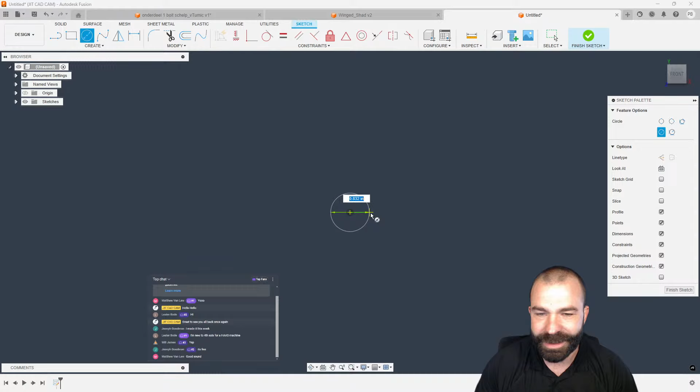In the meantime, I'm going to go ahead and swap my screen over here real quick, and we're going to actually start a brand new file because I am going to model what it is that Matt brought to my attention. And I'm not kidding you guys, this was maybe 5-10 minutes ago. What he has is a very specific kind of profile on a part.

Now let's go ahead and give this some rough dimensions. And once you guys see this, I think you may or may not be able to paint the picture of what this could be. And we're going to throw another rectangle kind of around everything here. And that's going to be a little exaggerated, so let's bring that down. Let's get this guy brought down and extrude our profile. So on something of this nature, now there is a gap up there. We're going to have to fix that.

There we go. The issue is undercutting inside of a part or a profile when machining. So as you guys are going to see here in the specific use case, there's something that he is making that supposedly rhymes with rock, that it's very important that you get in and machine out these undercut profiles. Now, I may be wrong. I don't think it's rhyming with rock. I think it rhymes with something else.

Let's get into our manufacture side of things. As you guys know, we're going to go ahead and do our Z axis. Let's put X in the right way just because. And then with that, we're going to start to attempt this with a couple of toolpaths. I am going to fix my setup because it's going to be much easier to generate my stock model as we work. Now, the question is he was concerned about using a parallel toolpath with 5-axis. And with that, we're going to start with the basics, which is let's get our toolpath basically where we want it.

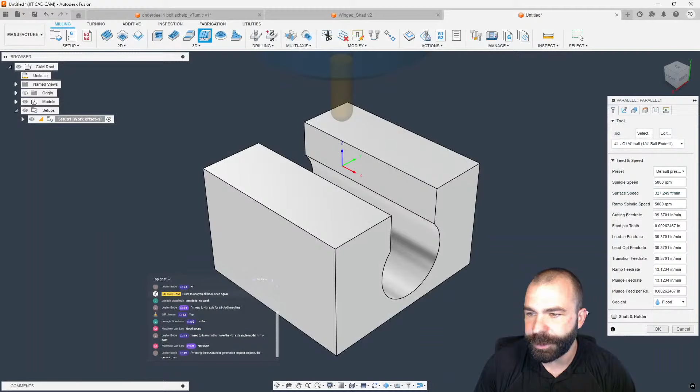So I'm going to go ahead and select the tool. Now, whether or not you're using a ball end mill on your end, that's going to come up to you. I am going to actually have to pull one from the default library. Get us a smaller 1/4-inch ball end mill here. I'm going to swap out the holder once we get everything set up. So again, we're going to go back from there. Let's go ahead and get that tool stuck out. Give it an end mill holder. We should have something in here. So give me a few seconds here, guys.

That is not going to work. We're going to need something that's kind of like a long extension. I think this is the one I'm looking for. There we go. A little better. Now, the idea right out of the box, we're going to go ahead and hit OK and get a toolpath. But as you guys can see, as of right now, everything is still in 3-axis mode.

So I'm going to go ahead and shift gears and let's step up the capabilities here. Now, what I'm going to do is go to 5-axis. Now, we could use vertical, and what vertical is going to do is keep our tool pointed vertical as much as possible until it can reach underneath or it starts to hit that tool holder. Now, the problem with a strategy like this is because it is still defined as vertical, it doesn't know anything that is going to happen with undercutting.

So a few more things I might need to do here, as you guys will see me walk through, is utilizing a different strategy. Now, this is where we get into our actual different types of control for primary tool axis. One that I would recommend is we could either go from curve, which would be very, very valuable, or from point. Now, the reason why I'm saying from is because on this particular part, we are working in a female or like a negative side of a cavity, right? So we want to always keep our tool from a specific location.

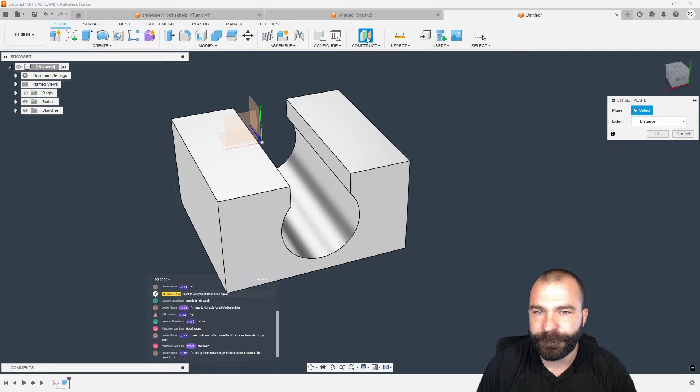So let's go back. Go into our design. I am going to clean this up a little bit because from what I remember, this top is actually much lower. Again, just making it a little easier when we create our toolpath. As you can see, that's now done. And I am going to create another kind of plane to work from. So where you put this plane at the end of the day will make a pretty big difference. But I'm going to go ahead and create my construction plane.

And I'm going to place it on the top of my part because I can move that plane at any time. And upon moving that plane, we'll move the sketch that I'm about to create, which is going to be nothing more than a line down center. So as you guys can see, that line is up there in space. If I go back to that construction plane and I pull it up higher, that line is now moved up higher. If I pull that plane down lower, you're going to notice that it brings that line down lower. So again, this is a neat little trick, especially if you're doing some 5-axis stuff.

So let's go back to manufacture. Let's get into our toolpath and swap out our primary mode to from curve. And then our curve is actually going to be that line right there. So as you guys are going to see now, up on the top, completely useless. But what is going to happen is once we start to get down underneath and start machining things. So again, we could make some more adjustments here. If you guys didn't know, this is where we could go in and select our boundary.

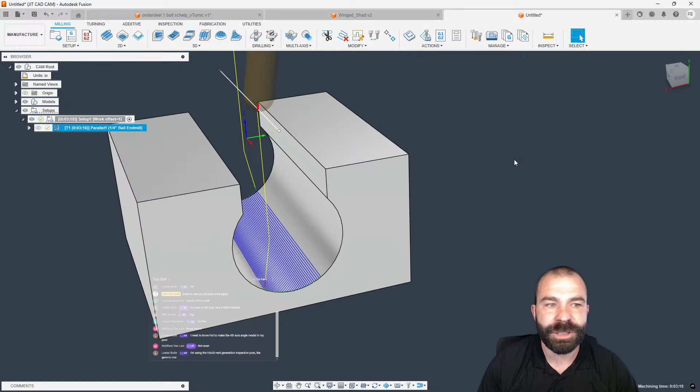Now our boundary could be based on some of these profiles, but because we have overlapping in the corners, I don't know if you guys could see that, it's going to really shrink down the profile we're working with. So this is one of those very few situations where staying silhouette, however, doing an avoid surface kind of selection might be beneficial to you. So we're going to go ahead and say avoid surfaces, and we're going to generate that toolpath back. Again, now we are inside of that cavity.

And if I was to simulate this, let's get squared up to our part. You're going to notice that my tool axis right here where this little point is might be actually a little tricky. Let's flip sideways. That is the center line of where my tool is calculating from, right? Yes, I know we're crashing the machine right now. Not a big deal. But that is what's determining as we work down and back across the part.

I'm going to go ahead and hit play here. And we might have to adjust a couple of things. Let me get my accuracy turned down a little bit. But as you're seeing, that tool is slowly stepping around, almost like a clock, right?

That minute or second hand on a clock, we're working around, always maintaining center line of that actual edge. Now, this is where it gets better, because if I go back to design and I lower said point, what you're going to notice is when we're in the manufacture workspace now, that tool path is going to tilt further and further and further out.

Give me one sec here, guys. I got a little bit of an itchy nose going on.

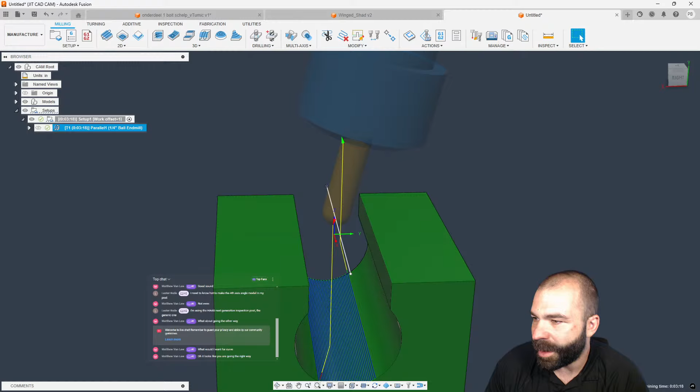I need to know. Okay, Lester, we're going to get back to you. What about doing it the other way? What would I want for the curve? Oh, it looks like you're doing it the right way. Yep, 100%. So I figured you wanted to run down that surface.

Now, at this point, one cool thing is if I was to change my pass direction to horizontal across my part, same rule is going to apply. We're going to swoop back and forth inside there, but it's simply just going to constantly maintain the center line of that tool. So as you guys can see, she's just rocking back and forth. Again, we want center line of tool to intersect with the line that I generated.

So as you're seeing, if that line gets further and further down, there is going to be a point where we actually need that line to be at a minimum tangent off our circle, but also I am going to fix our tool here real quick. So give me a quick second. We're going to go in and I'm just going to pull that end mill out a little bit longer. Let's say 2 inches.

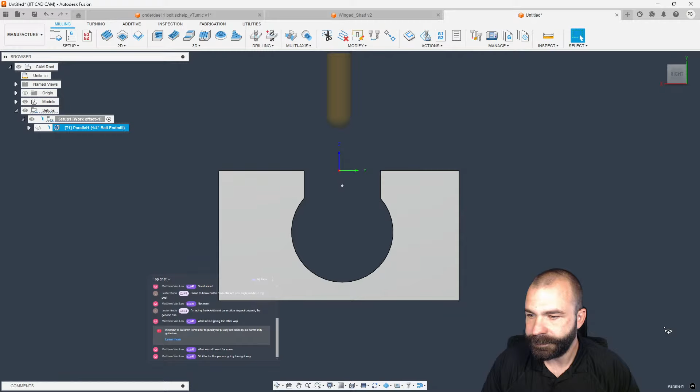And then with that, let's go ahead and jump back to the design side. And we're going to bring that actual plane down further. Now, if you get too far down in here, the rule still applies. We got to worry about the back side of the tool versus the front side of the tool. And I will have to actually take off pass direction. And just like that, we're starting to wrap around a little bit more.

But the real problem is going to arrive at the fact that this is a 3-axis toolpath. Actually, I shouldn't say, it's a 3-axis toolpath with the ability to do 5-axis. Now, this is where you may want a completely different strategy to do undercutting. A couple of remedies to this would be instead of doing 5, we may actually want to go through and do this as 3 and do tool orientation.

So as you guys can see here, I'm going to go ahead and use my good old-fashioned steering wheel controls. But if I was to tilt and turn that tool, as you can see, I could start to achieve more things, getting further and further underneath of where that profile is. I'm still limited at the end of the day. I still need to possibly go in and add additional faces to my avoid grouping. And lastly, let's tilt our tool just a little bit more.

Now, I am going to switch strategies here because I think there's going to be a better strategy overall to utilize against a part like this. And that strategy would be getting into steep and shallow. And then from steep and shallow, I am going to force steep only. The reason why I would do steep only is because it allows me to machine undercuts.

Now, when you're using a lollipop cutter or 5-axis, it will actually look at anywhere that it does not have accessibility. This is a pro tip for a lot of you guys out there: if we go ahead and turn on 5-axis, you can turn on tool axis or tool orientation without ever actually needing to define a different direction. But what's neat about this is you can actually do an accessibility analysis in real time.

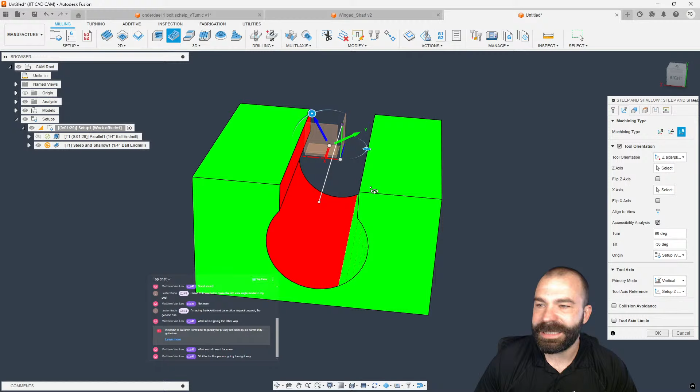But let's get back to it. So we're going to go ahead and turn off tool orientation. I'm going to leave ourselves vertical to start with. Again, let's just get a tool path on the part. As you guys are seeing, we're not getting underneath anything. We've also got a lot of extra stuff going on. So let's get the blue lines where we want them.

Machining boundary is silhouette, tool center. Again, we're going to go ahead and go. We actually probably won't need to do any of the fancy avoid touch surfaces. But Matt, let me know what you think. So this is kind of the strategy you're going for with going back and forth inside there.

Now, again, with the steep and shallow strategy, we could utilize 5-axis. We could then go lead and lean, or again, from curve, picking that line that we have. And as you should see, we're now wrapping down, under, and all the way through. Again, still dealing with collision avoidance. There's a lot of little nitty things that I would have to go through, but this is where we could get even more and more fancy with this.

I'm going to turn off the linking so you guys could just see the toolpath. But if I go back through here a little bit more, let's say we actually do steep and shallow this go around. However, we're going to do parallel. Again, you could do parallel on fixed direction. So we're using contour in the steeps, parallel in the shallows.

And what you're going to see now is, again, because we lost the undercut ability, we're not getting all of that in one shot, right? So this is something that Fusion, again, takes a little bit of time and effort to start to work through and figure out what's going to be your best solution.

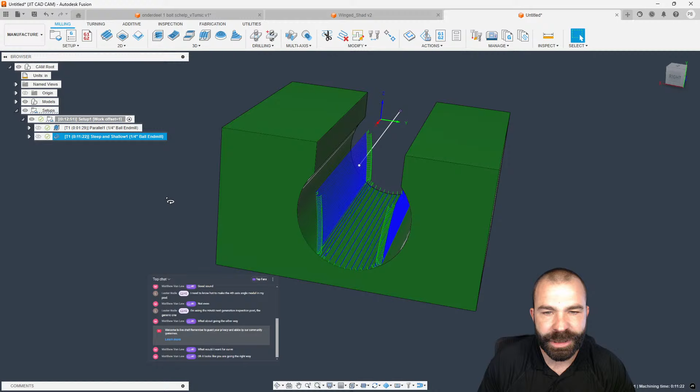But what's happening right now is everything is being calculated from tool orientation Z, right? So it's not going to drive the steep versus the shallow based on the exact location the tool is pointing. It's all still generated coming straight down in Z. So again, if it was me, this is just my take on this, we would go ahead and utilize steep only, machine undercuts. Again, you're now getting that undercut area.

And for those of you out there that don't know, technically the bottom on this use case, there is a giant opening for a certain particular item to come up through. So Matt, I'll give you a few seconds. Let me know how that looks for you. For the rest of you guys out there, feel free to ask questions at any time.

I see Lester went blasting through here real quick. Need to know how to make the 4th axis angle modal in my post. Okay, using the Haas Next Gen inspection post. Lester, are you using machine definition at all? Because that is exactly where I'm going to point you to. Whether or not you use machine simulation will make basically all the difference or none of the difference, but the machine definition is the important part.

So what I'm referring to is if I go in and I select a machine. Now, as you guys know, after this, we eventually delete all of our machines. But what I'm looking to go for is I need to go to the Fusion library and find that Haas machine. So again, as if we filter by Haas. Now, what machine is it exactly, Lester, that you have? And what rotary do you have, if you don't mind me asking? So we'll give you a few seconds.

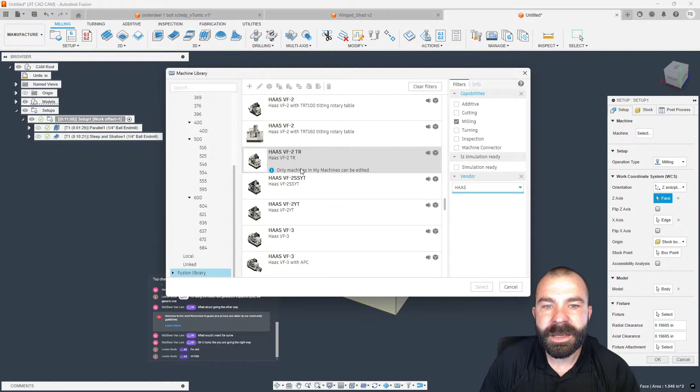VF2SS. Awesome. So there is a ton of different machines inside the Fusion library. As you can see, there's a VF2TR. There's a VF2 with a TRT 160. So you have an HRT, not a TRT. Now, sometimes it's easier just to search by HRT. Again, you're not going to possibly find your exact model. Now, this is where, if you guys have our support package, we have no problem putting together the correct actual machine sim for you to utilize, right?

Now, if you're just wanting to go out and post some simple 4-axis code and you're not worried about machine sim, what I would recommend is that is where you could start by just building your own machine. So as you're going to see, I hit the plus here, pops out this window. We're going to go ahead and call it the Haas VF2SS, and then I love to throw a with HRT 160. Don't really need that generic description, of course.

Now we're going to go down to the kinematics area because we need to order our axes based on how they stack up. For example, the head of your machine or spindle sits on Z. Your X actually sits on Y. And then here with X highlighted, I'm going to add a rotary axis. Now your rotary axis in itself, a few quick tips for you guys.

If you do not have dynamic work offset and things of that nature, we're going to go ahead and turn off TCP. Now, another thing you may want to do is either go unlimited, limited, or cyclic. Cyclic is going to take whatever the dimensions are divided by 360 in this case. Or again, most 4 axes are unlimited. This is a really good point for any of you guys out there dealing with a gantry 5-axis. You can't spin the C axis unlimited. You actually have a limited range or the B axis tilt.

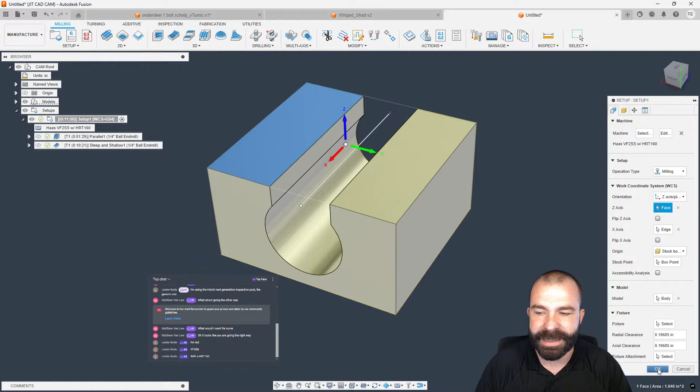But from there, we're going to go ahead and throw a post processor at this. I think I have a completely broken Haas Next Gen post. I am going to update this post to delete any types of problems I have in the background. But just like that, I have now tied the post processor to machine definition, and machine definition is controlling that. The value of this at the end of the day is if you are in a shop and you are responsible for programming multiple different machines, when you tie the machine to the setup and go to post-process things, you don't have to worry about making sure you selected the right post processor. You can also change the output folder, which is extremely handy.

So as you guys are going to see here, let's go ahead and make this a full 4-axis. And as you're going to see here, guide curve cannot use. So we're going to go ahead and turn off guide curve and say 2 rotary axis. I think we're going to get a lot of problems with what I'm trying to do here, but we could go ahead and switch tool paths into tool orientation. Now, something neat, with machine defined, it is telling me that certain things are not capable. So again, we'll just go with the basic facing cycle.

Let's go ahead and go into my templates. Boom, there's facing number 1. We're going to duplicate that. Tool orientation, Z this way. Your A axis does actually require to be pointed in the correct direction as well. But if I was to post-process this out, Lester, I think you're going to get exactly what you want, which is going to be your A0 command and then your A negative 90 in this case based on my tilt. Now let me know how that is looking on your end, and is that what you're looking for?

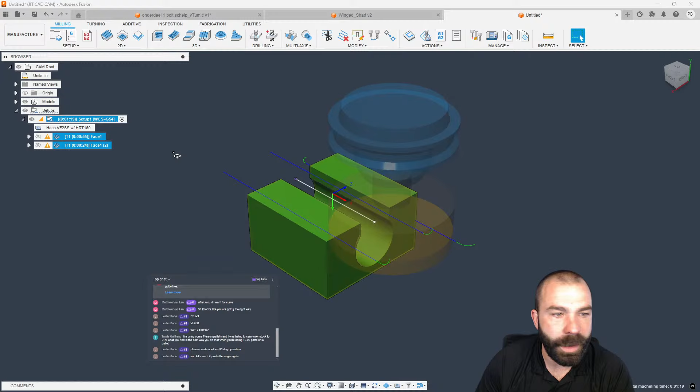All right, so please create another negative 90-degree operation, and let's see, okay. So do you want me to go about the palette situation? Are you running first setup out of a bar, or are you running individual blocks on a palette?

Man, I don't know what happens to me. Every time I come in here to go ahead and start these free videos and everything for you guys, my nose starts going wild. Lester, we'll give you a few more minutes to answer.

I'm going to go ahead and just create both of them just to see. So again, we're going to go ahead and flip our tool orientation down now. And one more time. And I'm going to actually visit this issue that I'm having. There we go. So you guys are seeing I'm getting this warning, and the reason why I'm getting this warning right now is because I made my stock the exact same size as my part itself, right? So again, because of the parametric recognition of my heights tab, stock top right now and model top are the exact same dimension.

All right, just duplicate the operations and post. Sure, no problem. So let's go ahead and post process. Again, post it out with all 4 sides. So we're starting now at A0, a negative 90, a negative 180, and then a negative 270.

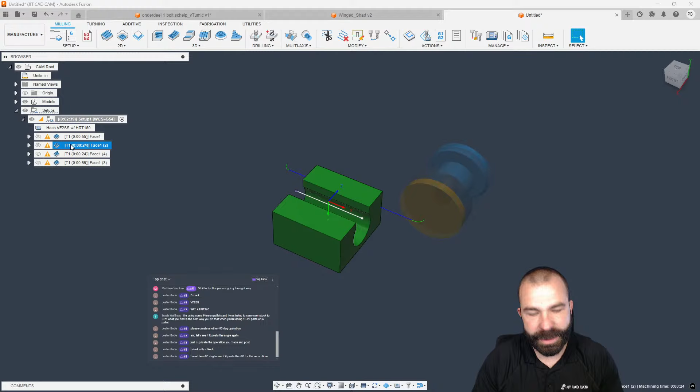I need 2 negative 90 degrees to see if it's possible. Oh, see if it posts the negative 90. Okay, I see what you're saying. So if I duplicate, what we're doing now is we're staying at the same tool orientation when I post process. And what's going to happen is, as he's requesting, A0, a negative 90, but then the second facing operation does not have anything on it for a position, because currently Fusion thinks you're still at that last known position.

Now, this leads me into a pretty good point for some people: in the event that you actually wanted to pick up and run from a specific operation, there is a setting on the next gen controls that allows you to turn on program lookback. Now, if you don't want to do that, when you go to post-process, there is an option to safe start all operations. So by turning that on and reposting this exact same code, what you're going to notice now is A0, we have block skip, abilities to skip over any detail, a -90, and then when I scroll down further, because safe start operations is turned on, you're going to see block skip G0, a -90.

So as you guys can see, nothing more than a little checkbox for safe start operations. It's going to basically take every operation that you're doing and generate that with all pertinent information to that specific one. Now, something I will point out too is I'm still seeing G254, G255. That is the dynamic work offset or tilted coordinates plane. There's a lot of names for it.

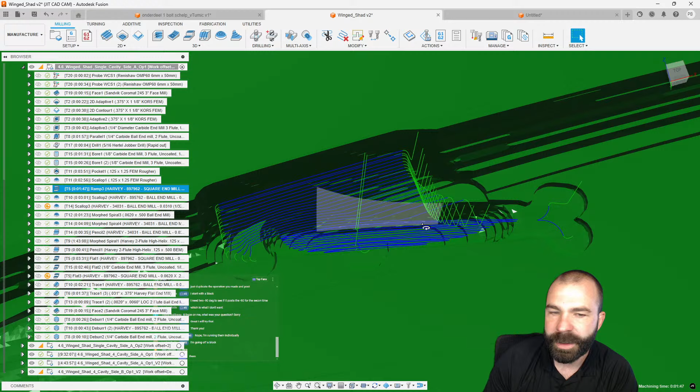So right now, he's got scallop to clean out the material here for this fishing lure. Then he's going into a ramp tool path, and he's ramping downwards. But what I looked at, and the reason why he possibly is breaking a tool, is if I just click through some operations, you can notice from tool 5 to tool 10, there's a lot of material being removed. But with that being said, it's the difference in the overlap of the two tool paths themselves.

So as you're seeing, we have that ramp tool path getting down there a little bit. And again, he's doing a tool change from tool 5. This is a 0625, a 1/16th ball end mill. But this is where I think I would change what strategy I use, right?

So I'm going to go ahead and steal his information and we're going to jump over to, again, steep and shallow. Now, the reason why I like the idea of steep and shallow here is, as you guys will see, I can basically merge down both of the tool paths he was trying to do. Again, we're going to have to drag this back up to the top, I have a feeling. Let's get it back up here with everything else.

And with that, we should see a tool path, and we don't, which leads me to believe that something's on my end. Go ahead and regenerate. And let's see why we're not getting a tool path. Do we have rest machining turned on? We do not. There is our tool containment. Now that tool containment in itself, I also did point out the fact that he may want to go a little bit further out with that information.

But for some reason, I lost all my tool paths. Did we just find a bug or did I push F7? I pushed F7, chasing my own problems.

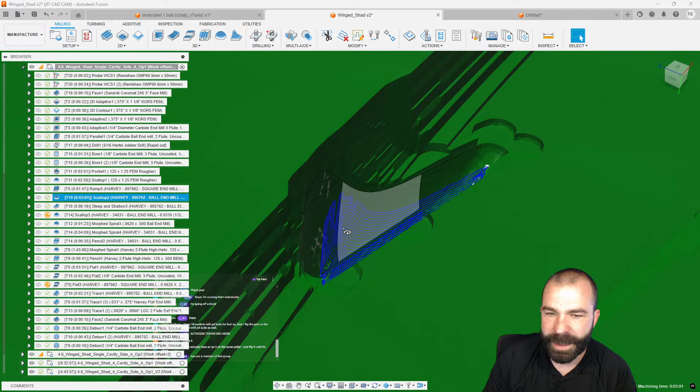But as you guys can see, this is something that I think would be a night and day difference on a location of machining like this. Again, that scallop toolpath you can see is only in the bottom. You can see that parallel toolpath he's kind of only got at the top. He's also using two different tools. But if he was to go in with something like steep and shallow, he does have that ability to go horizontally across, working his way down. And then when he gets down into a lot of these lower regions, we're starting to pick up on utilizing scallop for the shallow and contour for the steep area.

Now, a few other things that I usually do recommend when you're getting into a tight little working area like this is the amount of material you're leaving on the walls makes a large difference. I just want to show you, if you guys didn't know, if I go in and I try to simulate this, as you're going to see, if I push play and let that run, we're going to get down inside that cavity. But now you can actually go through and inspect stock to model, right?

So if I put my mouse right about here, you're going to notice I have 027 material. Getting a little higher, 030. Now, if I zoom in a little bit further, you're going to notice that my graphics card kind of falls apart, but that's what we're looking at in that tiny little region. So the reason why he's possibly breaking end mills is at some point he's going in and slotting to remove material with those ball end mills. And honestly, that's where I think the tool is breaking. I'm almost more than certain about it.

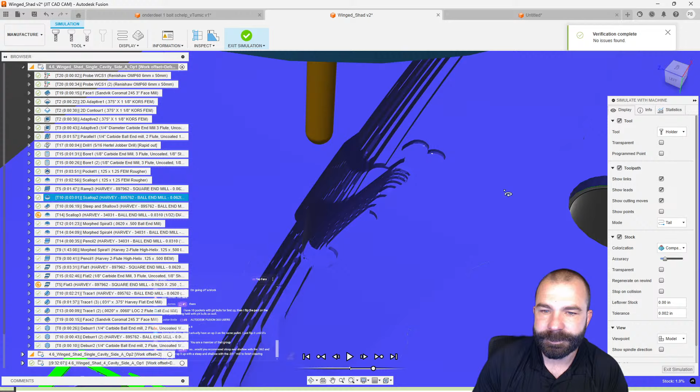Now, another thing I did notice, I'm going to go ahead and jump to his next tool path here. Give it a sec. On this very first path he makes, if you notice, he's plunging down, and now he just plunged into that corner, right? So he smashes down. I don't know how close I'm going to get without turning the accuracy up here. Again, plunged. He's already touching this back wall as well.

And then as he comes across this very first surface, you're going to notice that he's going back up, over, and then bam, plunges way down in there and loads up that tool. So this is something that is probably causing that tool to break at the end of the day. So as you're seeing, that would be where I would start to point my finger.

Where that tool is breaking is because you're loading up that tool in this corner when there's still material there in the way. So it's kind of hard for me to get back. I don't know if the model's going to come back through very quickly. We'll give it a few seconds here.

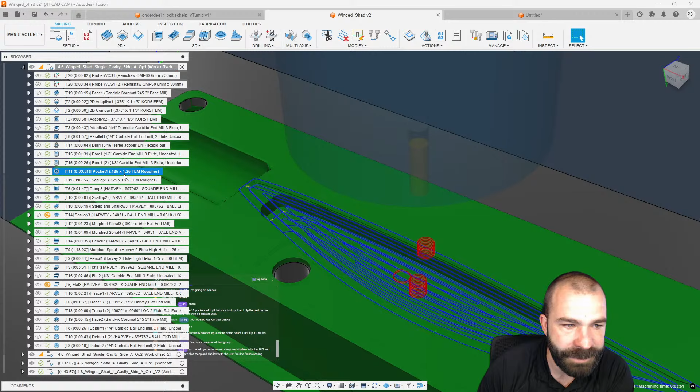But yes, overall, what I would recommend if this is something you're planning to do: the very first thing I would do is, it looks like you roughed out that pocket with a 1/8 inch end mill. I would in some way then go and transition. So it looks like you come into tool 5. So I would actually come off of this tool path. Again, I just duplicated, swap out to tool 5. There it is. And then utilize rest machining to eliminate where I can and cannot go.

So I think you were set to a stock of 4 thou. We get rest machining turned on from previous operations. We want to ignore stock less than 20. Let's go 25 thou and see what we get. As you can see now, Fusion has automatically picked up on what is still left to be machined, which is at least getting me into some type of roughing in that corner. But it's not good from there to jump in and try to do other additional things.

Again, this is where we might actually have to go one level deeper. Again, duplicate. We're going to go ahead and now go to an even smaller tool. As we're going to see, we have a 031 flat here now. And let's see what we get. So again, anytime I can open that pocket up more and more. I think there's a few other settings in here that he may have in place. Max roughing step down. Okay. We don't have minimum step downs or anything turned on. Beautiful. Oh, because you're doing a pocket strategy. That would explain also some of the stuff going on.

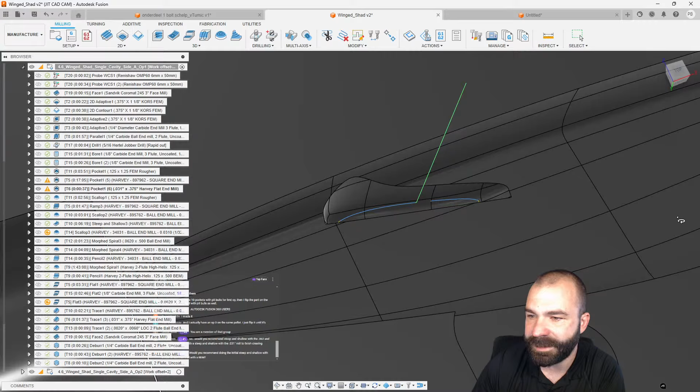So again, you may actually be a little backwards in your thinking. So let's go max roughing stepdown. We'll have to fix that. But now you're seeing that the roughing is really starting to generate more and more. So let's go in. We're going to go ahead and give this the selection that you originally had, limiting our toolpath. As you can see, something as simple as your max step down is also something that could have been breaking tools. But what I'm doing now is I'm just going through, cleaning this up a little bit.

We need a 030 possibly on this tool. Selected boundary once again, because we're just working down inside of more or less a groove now. So again, we don't need to do the entire pocket. We could just focus on that one little area. So how's that looking on your end? Give you a few seconds there, Will, to let us know in chat.

Now that all that material is out of the way, right? Regardless of what strategy you start to do in there, you're going to notice from this toolpath to this toolpath, there's not a huge amount of material actually really getting removed, as in plowing that tool in there to break stuff, right? So again, getting a little bit further, your scallop might have been a little bit better, but I still think at the end of the day, I would have went steep and shallow here. And if I drag this up, we should be able to see this. So again, we go ahead and simulate this tool path.

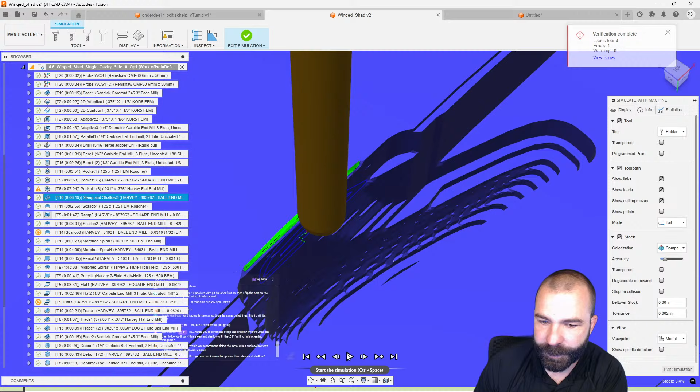I'm recommending going from a large tool down to a smaller tool as much as possible, right? So again, as you're seeing this tool path, a little quick here, let's get it slowed down. We're working top down also, which means we're never really plunging that tool down into our material. We're taking minimal cuts as much as we can. Again, even when you're starting to get over in this corner, we're just working downwards. We're blending everything nice, clean, and smooth. So usually the use case that I would use on a mold cavity is kind of like you have here, right? Big flat end mill to rough everything out, smaller flat end mill, smaller flat end mill, right?

Then we go back. Now, again, this might be personal preference depending on who you are. You may want to finish, if you're going to go from a big end mill to another end mill, very simple to do so. Then go smaller, smaller, and smaller, right? So again, there's a lot of argument out there. I see more of you guys showing up in chat, but overall, usually I always want to work biggest to smallest and tend to stay with a bigger tool as much as you can. It's not always the use case. Sometimes you got to swap out one way or swap out the other way, right?

So this is where, again, if we look at this, you're doing this with an 062 flat end mill. Now, I may want to get in there with your 062 finishing strategy, if I can, right after. But what would determine that on my side is, did I get enough material out of these corners to make a clean tool path, right? So again, I look at that pocket clearing, pretty heavy steps in there still. So I might make that choice to actually utilize a smaller tool to rough out before going into my bigger tool roughing, if that makes sense.

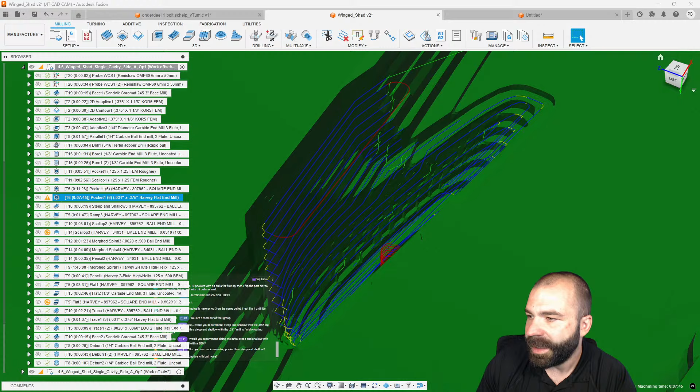Can adaptive with the ball nose? Yes, you can 100% do an adaptive clearing with a ball nose. Same number of parts. Awesome. So we'll go ahead and jump into that. So I still really need to do this. And now that Travis is bringing this up, it's a great time to remind me to start to get into the world of utilizing the ability to link toolpaths to one part and apply them into an assembly or like a tombstone kind of configuration.

So with that being said, I'm going to shift gears here real quick. In the cavity, Stuart, yeah, real quick. So this is technically a pocket strategy. Let's switch over real quick to adaptive clearing. I'm going to have to drag this up. Here we go. Let's get back up to the top. So that is now an adaptive clearing strategy. And then the problem is going to be we have way too tight of an area, so I'm going to have to get minimum radius turned up. But you can 100% rough out with a ball end mill. It's not really recommended, but you can.

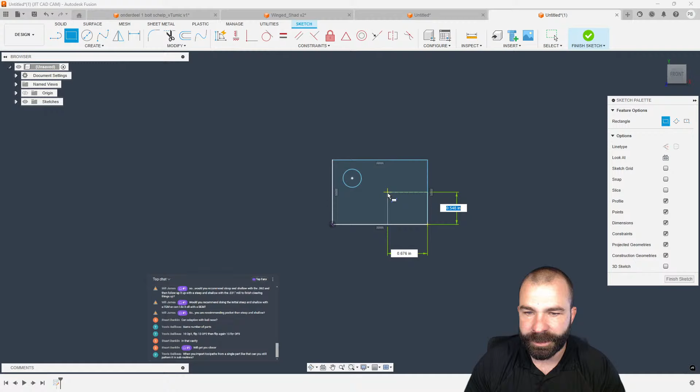You can definitely do a toolpath strategy for roughing with a ball end mill. It could get you closer, yes, by all means. So the idea would be, Travis, as you're saying, yep. I'm going to do this very generically because I'm going to need a couple of things for this to work. First and foremost, I'm going to generate a very simple part. We have a rectangle. We have a hole. Let's throw a second rectangle in here. I'm going to build this as if it's just a rudimentary shape. This is just a placeholder.

Now, normally, if I save this, this would be your part. In the case of this part, I can apply toolpaths to an individual item. Pet peeve of mine, get the sketch out of the way. We create our setup. Where you create your setup work offset does make a difference. If I was building out some type of pallet system, I'd probably want a uniform location. Again, this is all built off what you're going to utilize in your shops. Let's go ahead and face this off. Where do we go? Local libraries? Oh, that's right, I grabbed a bunch of stuff and burned them. There we go, facing it off.

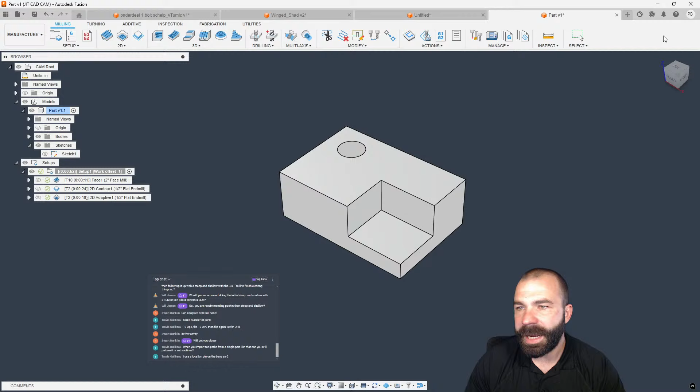Let's throw a path around the outside. Again, let's go VF2 half inch flat. There we go. And then maybe a real quick adaptive clearing in here. So as you can see, I've applied a couple of toolpaths to this part. It's now started to change and modify. Now, where this is going to look really funky is if I was to now start my jig and fixture. So we're going to draw this up on a second sheet. I'm just going to make a very simple pocket for this. Extrude all of this. Repeat extrude.

And as you guys can see, I now have the pocket for the part to sit in, right? So the idea is this is now my pallet. And with that being my pallet, I may have multiple different pallets for the multiple different setups. But if I was to build everything out properly, and I say properly here because I screwed that one up already and I'm trying to cover up for it, the idea would be you would now have your manufacturing, right?

So with that, if I go in and I now start to insert my items, right? So we got our parts. There's my part. Here's my pallet. Give it one sec here. There we go. Part, pallet, so forth and so on, right? So if I was to now do a joint, or if you guys didn't know, you can now do three-face alignment, which is sick. Let's just say it's going to sit there, right? These are all placeholders and these are all hypotheticals.

Now, when I jump over to the manufacture workspace, it's going to ask me to insert said manufacture data. Now, this is what we're after at the end of the day, because now this setup is linked to the part, which includes all my toolpaths, right? Now, this is where we can either start to pattern or multiply or build out more and more pockets.

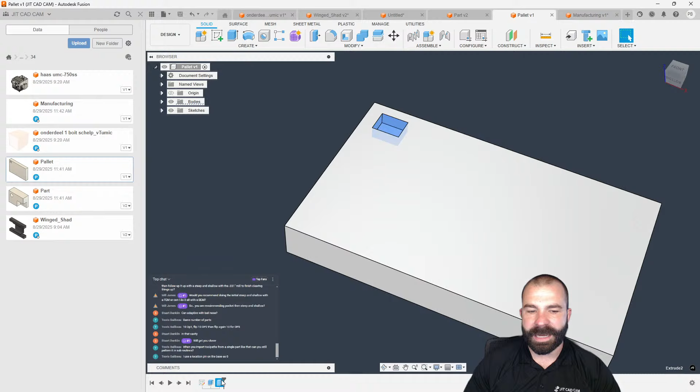So a couple of tricks here is, as you guys saw, I extruded that pocket separate. Makes it easier if I just wanted to do a rectangle pattern of features. I can grab that feature. I can now set my axis and direction. A couple this way. Go ahead and do a couple that way. And as you can see, the pallet has gotten much crazier. So again, we go back to manufacture. We're going to bring through the latest design.

Again, this is a pro tip for you guys out here. This is where you got things like your duplicate with joints. Very neat thing. I picked that first part, and just like that, I can go place these additionally, right? So this is something very quick, very fancy. You could have also patterned this, guys, by all means. But once we go to manufacture, again, we could insert the CAD data to all of those.

Now, this is where you might have an argumentative thing. Because on one end of the spectrum, each one of these right now is its own work offset. They're all individually placed, but the toolpaths themselves are still linked together. So if I was to post these all out, the real problem is I'm going to have G54 times like a million. But the other side of that is if I go to operations, minimize tool changes, everything is pulling through as needed, right?

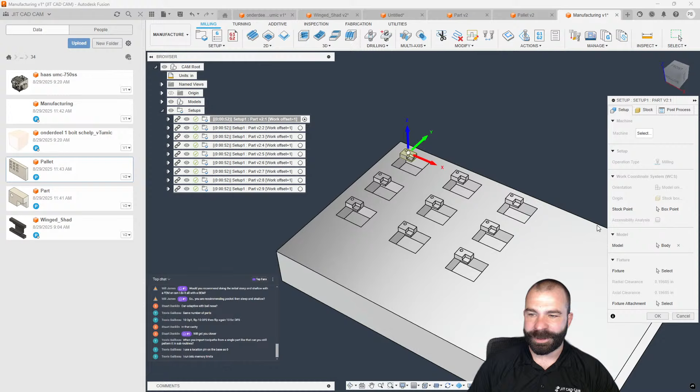So from that, as you can see, one way to do that would be to pattern out those components. Now, in my opinion, this is where I need to build content on this and get a little deeper and crazier with this, because as you're noticing right now, I really don't have any control over moving any of the items that we've brought through. So I'm trying to get with Autodesk to see what their end goal is with inserting manufacture data. Or do I need to know where that exact origin is, which doesn't make sense to me at the end of the day, right?

So again, as you guys are seeing, I can't apply fixtures, I can't do anything here once I go in to edit that setup because of how it's linked, right? So this would be one way to approach it. Now, if I was just doing something to make sure my toolpath can clear everything, this is a completely different scenario. Again, there's a lot of ways to do this, but the way that this is going to work best for you is when you get into setup 2.

Again, I'm going to create a new setup here. We're going to go ahead and flip Z. Again, continuous rest machining is on. And then we're just going to go ahead and face one item just so we have a toolpath to work off of, right? So as you're seeing now, we're facing off the backside of that part. We hit save. Everything's linked together. We got to go get the latest and greatest.

Again, this is why I'm trying to show this to you guys, this could be where now I need a new pallet. I'm going to rinse and repeat and use the same pallet here, but this is where you could position that second pallet. Again, flip it over, whatever you got to do for your second setup to align your parts, right? So again, let's just say we're going to do a joint from here over to here.

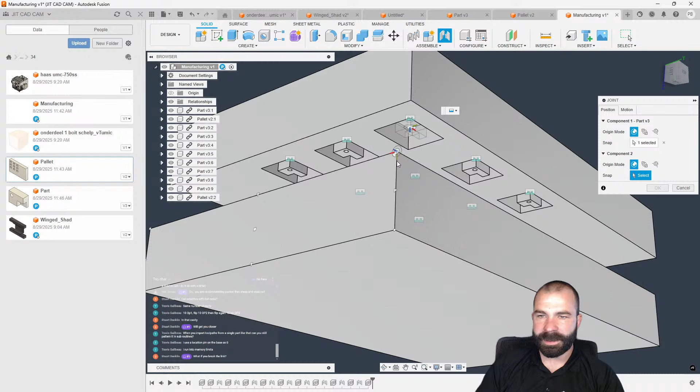And let's say we're going to rotate it. We're going to actually leave it there. I picked the wrong corner. That's on me. So let's cancel that. Again, perfect example. If you guys look, I don't have a corner to go off of here, but we could do now instead constrain component based on 3 faces.

So if I wanted this face here, as you guys can see, it snapped over. I can then add additional. Again, it's going to look a little messy at first, but here to here. And then lastly, we want one more, which could be possibly the bottom to the top. So again, that was a 3-face alignment getting into that second setup.

But when we make our way back over to the manufacture workspace, again, we've brought through our secondary setups now. Again, depending on which one you have active, your continuous rest machining would come through and utilize and show you that stock model. Now, it's not the cleanest of workflows right now. I understand that. And that's why I'm really trying to get with Autodesk to understand what is the goal here.

Is it nothing more than trying to put your vise on a machine? Is it going to work for multiple parts spread out? Is it really only a setup 1, setup 2 pallet system, right? But the fact that we're seeing this is about the best way I could tell you to do it.

I personally, at the end of the day, when I work in pallets, especially utilizing 1 per, I simply would just go in and lay out each one, and then it would just be, again, a design modeled pattern. And then I wouldn't care about toolpathing each one because I could duplicate my toolpath.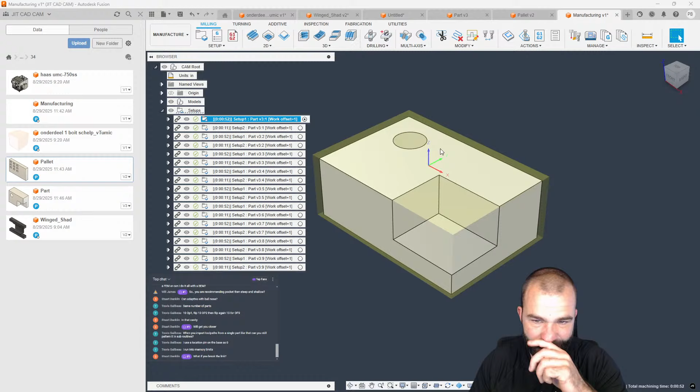For those of you out there that don't know this, I'm going to go ahead and get back to setup 1 here. And what I'm going to do is I'm going to create a brand new setup based on, in this case, we go ahead and expand everything out. Here's my parts. And then here is my fixture. And if we go ahead and hit OK, as you can see now, my newest setup utilizes all of those locations and parts, right? So again, there's several different ways to go about this.

I'm going to go ahead and just face this off. New operation, 2D face. There's my face mill. And then I could do a component pattern instead. So again, new pattern, component pattern, pick your source. It went out and found everything automatically.

I was just trying to see if you had an easier way. How would you separate the pallet with like a configuration for op2, op3? So I would have done just basically the same thing I did here. So if you guys notice down here at the bottom, let's get these other setups out of the way. We go ahead and break the link and then delete them all. So again, you could always break that link and then now have full reign over changing everything. I am just going to rip these all out of here.

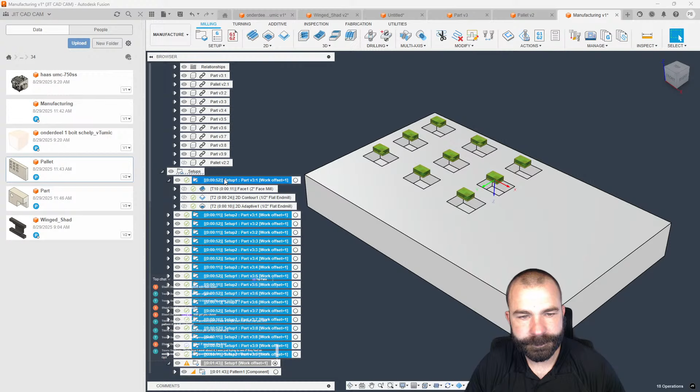And then with that, again, we did setup 1, getting into setup 2. Again, we go through, we pick setup 2. What is your models? Whatever they're going to be based on your, again, fixture, pallet number 2 now. Again, I will have to define my Z-axis, of course, which is going to require being flipped. No stock. We're just going to go ahead and leave that a fixed size box for temporary reasons. But now you're getting into setup 2.

Again, the real problem is, and this is something I've asked Autodesk a bunch about, is just when you're in here, this is where I think manufacture models would be one of the best things ever. But the problem is with manufacture models in play, it's just the manufacture model won't look at stock from one setup to the other.

And if any of you are wondering what manufacture models are, under setup, you could do what's called create manufacture model. What that will then allow you to do in your setup is to select a manufacture model. But when you select said manufacture model, you cannot really machine that part with continuous stock.

So it's kind of a double-edged sword with everything going on. And I'm a big fan of being curious about, like, what is it that they're trying to do? Because I now need to reference a specific model. If I utilize the same part, what you're noticing now is I can't really pick that part. It's a little messy, and I'm hoping to see that they iron it out and make it quite well. So any other questions outside of that before I jump into a few other parts?

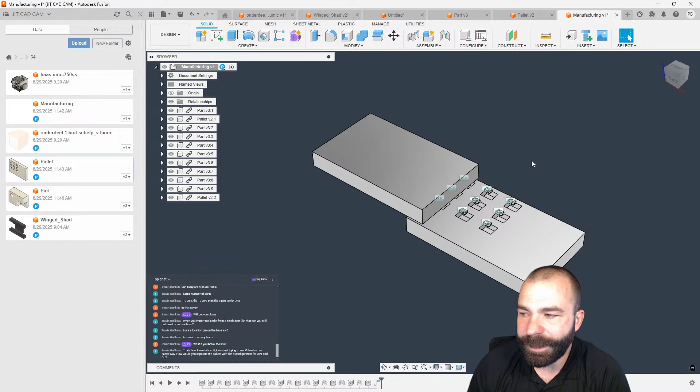Travis, again, I'm going to try to build some content. I've got to get down and figure out, again, what was the idea behind it? Where are they trying to go with it? So you could 100%, it's an old way to do it. As Travis is asking right now, I'm going to go back to the individual part. But as you're going to see here, if I was to simulate this, what you're going to notice is I'm left with a solid model.

Now you can right click on screen, go to stock, and then save stock, right? So as you're going to see, I'm going to output this. Again, you could save it to a project in the cloud. This is a representation of the material. Now with that, we're going to give that a second here because it should be loading, I think. There we go. And we'll now see a stock STL.

So again, going back to the side of manufacturing, let's get some of this stuff out of our way. I could now insert the stock if I had to, or presumably I should be able to go back to design, insert the stock here. We need to create a Fusion design here real quick, and then we'll insert that back in. Let that sit there and load. Didn't take too long. Usually goes pretty quick. We'll give it a few more minutes.

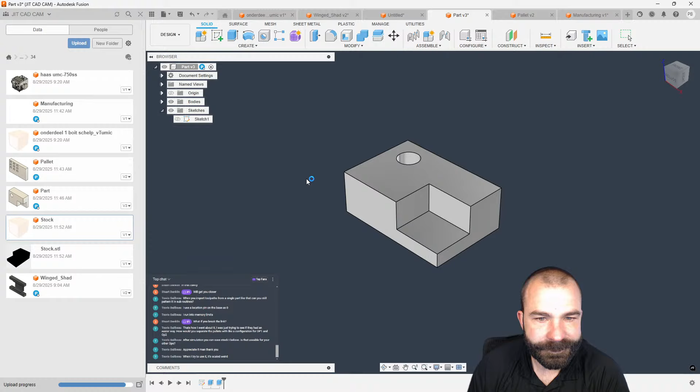It's scaled weird because it's going to be in metric, not inch. So when you insert it, that's going to be the biggest thing you're going to fight. So again, we're going to refresh here. We should have our stock now. Now I could drag and drop it in. So yeah, this is the problem he's facing: when I bring that in, the scale is way off, by all means, right? So you could put it back in the original file. Now, again, I'm just going to hit cancel here real quick and undo this.

Because if we were still in manufacture, when you get down here to machine your second operation, I'm going to just go back to fixed size box. Actually, I think it was relative size box. Regenerate that tool path, simulate with machine, and then right click stock. I could now load, get this up a little bit higher for you guys, stock, load model as stock, things like that.

Now, again, there are a lot of different ways to do this. You can see I could load stock. As you're seeing right there, that is now the stock in the background hanging out. So if I was to machine anything now, it should presumably reflect what that stock was. Now, the real trick to this, as you're seeing, is you're manually having to force this whole save stock. Now, you can only output it as an STL. It's kind of a really ugly hack that they remedied by utilizing instead the actual from preceding setup continuous rest machining.

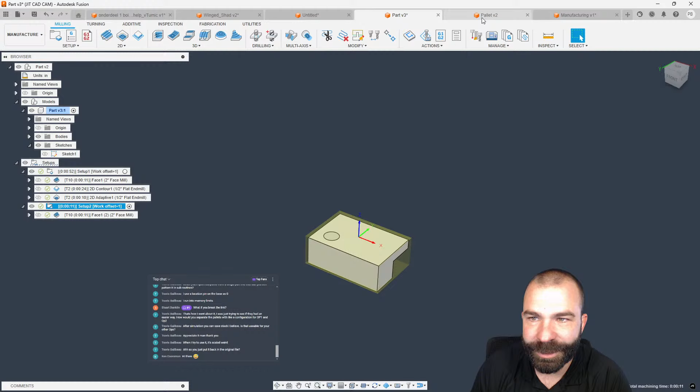My biggest complaint here, Autodesk, if you're watching this, is because it needs to look at the setup, all the setups need to reference the same model. When I use manufacture model, I cannot reference the same models. It's just this crazy, wild goose chase of what is the right way to do it. And again, manufacture models I love. It works amazing in the mindset of utilizing it for nesting. I would personally like to see it more utilized here, which would be super valuable. Again, we're going from setup 1 into setup 2. It's not a setup 1 and done.

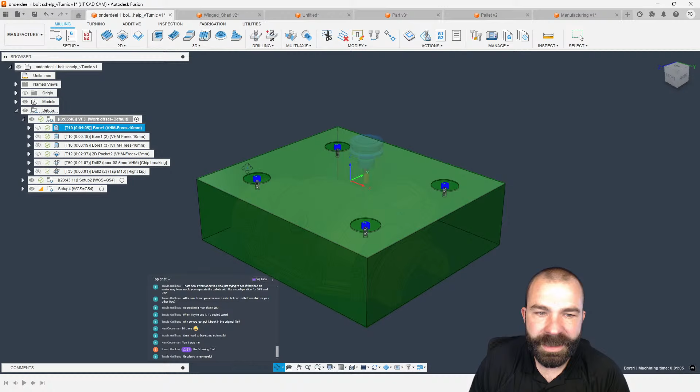And if you guys are wondering, he's adding a solid model for his stock to which he's mounting. And then I believe you're going to go ahead and mount this with, I believe, pull studs and stuff. So he's got his first operation here. Again, his stock fixed size box, pretty straightforward. I don't know about those millimeter units, but we can continue down. Now, I've seen a lot of people do this at the end of the day, and I'm curious why you guys like to protect your stuff.

But what I'm going to do is I'm going to check his second setup. His stock for his second setup, this is where, Ken, I'm going to pick on you here, is if you have a solid model for stock, you should probably continue using that same model. Now, the reason why you don't want to use from preceding setup is because although those features are milled, you've actually made your own stock. So this is where I would go from solid, go into his models list here, pick his stock, and then let's make sure the body that we're manufacturing is that housing. And then let's unprotect everything and make sure that we completely ruin everybody's day. There we go. And we're going to regenerate.

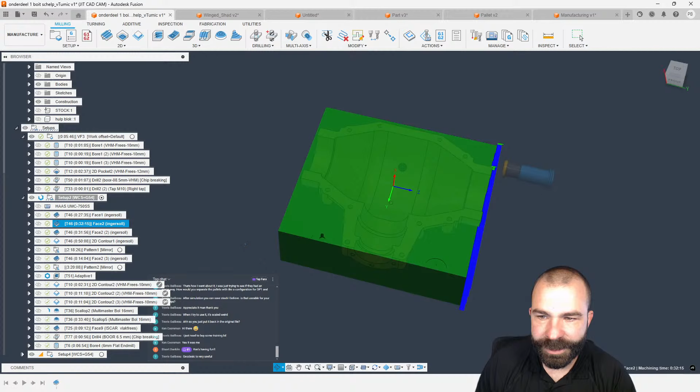So again, looks like he's decking off the ends here. Oh man, what do you got going on? You're in the part over there, aren't you? Or is that just my vision? Getting old. My eyes are going. There we go. So he has actually roughed in both ends. He's now doing the face. Okay, cool. And for those of you wondering, the reason why I'm doing this is if you notice the stock model is now loading in the background, which is something that is going to be very valuable when we start to work the other way.

Now, me personally, this might just be me, is I probably wouldn't have wasted my time with any of this stuff here if I didn't have to. And that's just me. It's just a lot of machining time for something that later on we're going to rough out anyways when we look the opposite direction at this part. Now, as you're seeing, he is roughing out everything inside. Few adjustments I might make is you use this big, lovely tool 46 up here. And then down here, you switch to tool 51. This is where I would possibly use tool 46 instead.

Another thing I would do if this was me is if you guys notice, this is taking forever right now to calculate. It's because he's using adaptive clearing with what looks to be a high feed end mill, right? So this is where I personally wouldn't have used adaptive clearing. I would have used pocket clearing. And the reason for that is because you don't have flute length. So let's just use the full width of the tool to be able to rough everything out. So again, we go pocket clearing.

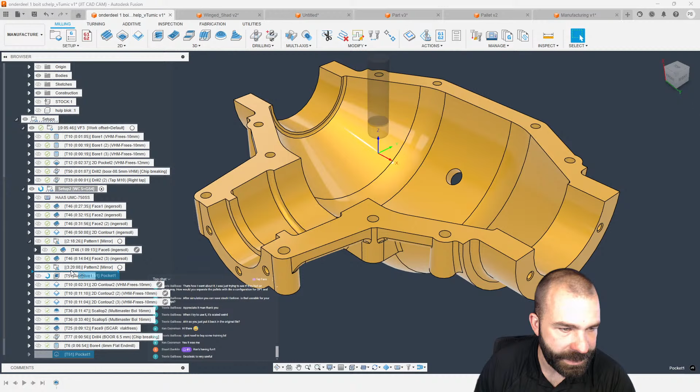Use like a 90% step over. So again, we have a max step down versus step over. And we're going to reorder this real quick up to the top. And let's trash this guy. So as you're going to see now, very quick pocket clearing, roughs out all that area. We could feed the crap out of that end mill.

So as you're seeing, we get further and further down. We should start to see more stock models come through. He is now starting to do some things on the outside of the part. Again, this is just my personal opinion as we work through here. Okay, so you cut the corners off of it. Trying to figure out what you got going on with 46. Okay.

And then you do this. Okay. I think we're good for the most part. Not necessarily the way I would have done this, guys. Don't judge me. Don't judge him, of course. But as you're seeing, he's slowly working his way through here, which is getting better and better. Now, this is a scallop toolpath for those of you wondering. This is a lot of toolpath here.

Now, depending on what he was going for, this is where I would possibly, instead of scallop, have gone for something like steep and shallow. Now, the reason why I would have went steep and shallow is because, again, we could have silhouetted this entire part. Looks like he's not trying to touch certain areas. That's fine. Go additional offset 0.

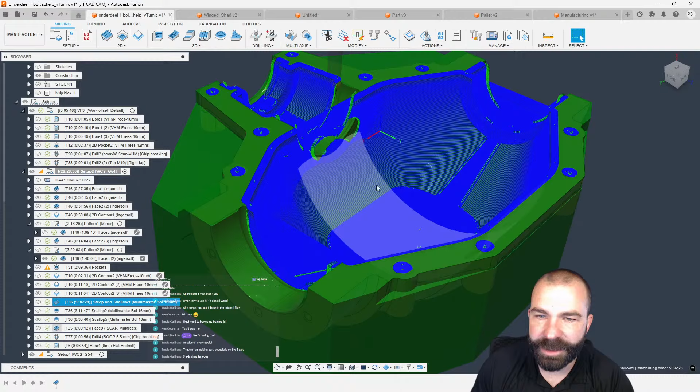I don't know the translation between millimeters and inch, but I think we're going to get a lot of what I want. So again, you guys are going to see now, if I bring this back up, there we go, with that steep and shallow strategy, I think he's avoiding surfaces in here, if you needed to understand. Now I'm going to show you some tricks here because this is very valuable, but the steep and shallow strategy, I don't know how well, can you guys see?

Again, we have a different step down so we can actually consistently step down the same in Z and then get to certain areas and actually transition back to that scallop. What you'll really notice though at the end of the day is his 8-hour cycle time for one area versus a 5-hour cycle time for specific areas.

Now, what I want to show you is a lot of people haven't realized yet that you do have the ability to group things together. So that's what you're seeing here, like where to go, where not to go. But you also have that ability, instead of doing avoid surfaces, well, let's get a couple of these out of here. And this is why I like steep and shallow, because I'm actually going to trash that entire group. So there's our model for manufacturing.

Steep and shallow has the ability to exclude flat areas. So we're going to get that kicked on here real quick. Give her a few seconds to calculate. And then we're going to actually use gouge checking. So this would be one of those situations that if you're going to bore these for bearings or seals or gaskets, I might actually go in and instead of utilizing, where was it here, a straight avoid surface, you could actually do gouge surface or things of that nature, right?

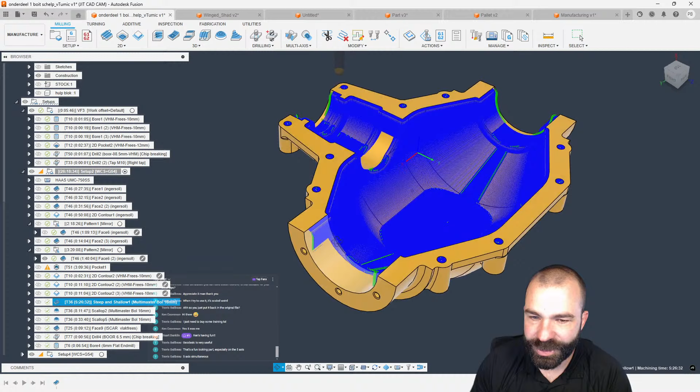So again, we could say gouge surface, wherever those are going to sit. Again, we have that to utilize for our toolpath, or using avoid in a smaller group setting. So if you guys have ever seen our training, we do like to justify that with that gouge surface, you're noticing that we're now avoiding those surfaces. But we always tell people, start at the top of this list, work your way down, only do as much as you really need to do.

Again, we don't have contact point boundary turned on. That would be a big one that's going to help a lot with avoiding those gouged areas, things like that. So again, there's avoid, there's touch, and then there's gouge as well. So not the cleanest of toolpaths at the moment, but this is just something I would walk through on a part like this.

Again, maybe instead of using gouge, we go ahead and utilize an avoid. Again, we could avoid here, avoid there. Let's avoid this little guy here. But notice how I'm utilizing the whole model; I'm no longer in a very specific selected boundary. I did things like avoid flat areas to stop toolpaths at certain times, things of that nature.

So again, we'll give this a few more seconds, but then we're going to get to the back side of the part. As you're noticing here, we do have that avoid touch surface on. We could change boundaries even more, but this is why I like the steep and shallow strategy. So let's get down a little further. Now, the importance of everything I've done so far is just so that when we get down here to the bottom of this part, we can actually get the stock model through

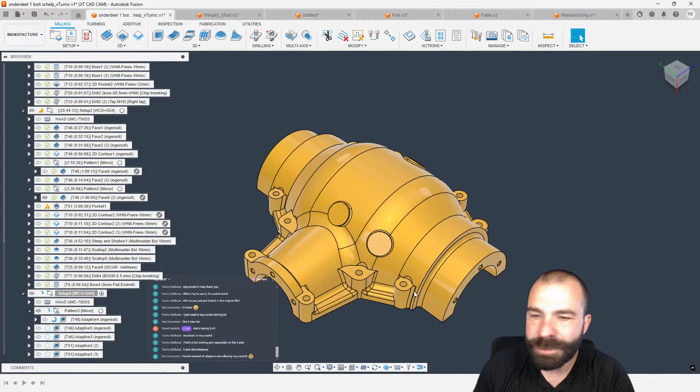so then we can look at the surfaces themselves. Now, one thing I did notice already is make sure when you're doing continuous rest machining that you check that continuous rest machining box, because that is going to be very important as the toolpaths calculate down and through. Finishing wise on this part, I would still look at something like steep and shallow or geodesic, depending on what you're going for. But my question would be, is there any aesthetic requirement to this part, or is it nothing more than machine it out?

We're going to have to wait for this. It's going to take some time. Again, this is the sad side of adaptive clearing, where if we would do pocket clearing, and let's get rid of adaptive clearing, now you can see pocket clearing just calculates extremely fast. I'm going to convert these all over so that we can get somewhere in a short period of time, pocket clearing back up to the top. I don't want to bore you guys with it. So what I would have done is just pocket cleared everything. Done from preceding.

Beautiful. So we'll give that a second to calculate. There we go. Ken, you owe me some beers. Just saw my phone vibrate, nope, somebody else that's hopefully wanting to give me money at the end of the day.

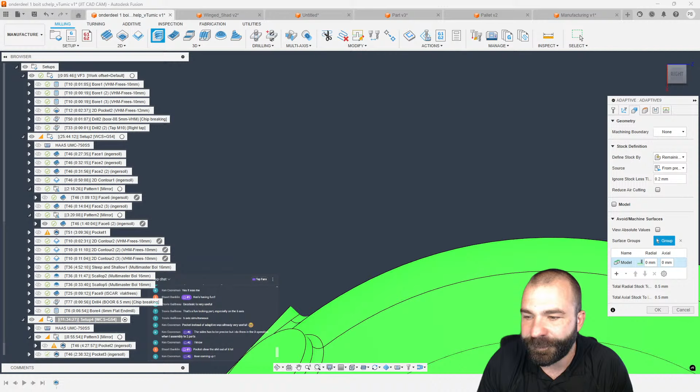So the pocket clearing strategy when you're using an end mill, I always explain it like this while this calculates. Pocket clearing is not necessarily for pockets. And my biggest argument is if I go into adaptive clearing in 3D, it's always defined by a boundary, and it's always based on inside that boundary, on center, or start outside. That's a pocket by definition, right? If I went 2D adaptive clearing, what's it asking me for? A pocket. So even though it is called pocket clearing, it's still utilized to do a lot of my machining.

Now I am realizing I duplicated some toolpaths. Those toolpaths were set to not go from stock top to model bottom. Let's calculate that one more time. We're also going to bump up the step down here just to get a much faster toolpath.

I am taking questions there, Chris. What kind of questions you got? As soon as Ken buys me beers, I'll answer that question and leave his part alone. No, I'm just kidding.

So again, we'll give that a few moments to calculate. I do like what you're doing here. You are roughing in one side, then jumping to the other. One thing I didn't do on my pocket clearing was, oh, nope, we do have from preceding. Beautiful. I feel like I saw a toolpath trimming somewhere in there. Maybe I'm crazy. Let's give a few more seconds for this. At this point, this is where I would start going in, and I'm a big fan of doing everything flat and then everything that's not. So let's see what we have here.

20 millimeter flat end mill. Beautiful. So now we're going to go out and recognize anywhere flat. And so you guys can see that's that roughing strategy. F7 to turn off that actual tool path.

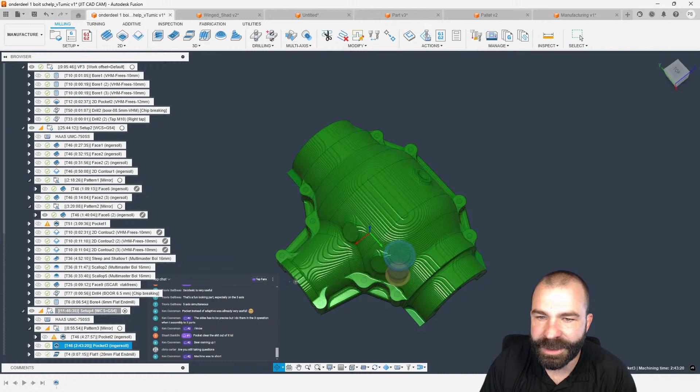Again, I don't want to say it, for what it's worth. You might have to give me a job application because the amount of time I'm starting to shave off this thing justifies my salary.

But again, what you guys are seeing is we just did that pocket clearing, not adaptive, with a shell mill. And then from that, we're now starting to go through and recognize all of our flat areas, right? So anytime there's a flat area, I like to see if I can pick that up automatically. Again, the whole goal is to get down to the finished surfaces and machine as much as I can before getting into surfacing. Now, flat does have the ability to utilize 5-axis.

Now, from that, you may want to limit your tilt angle. And this is why I was pointing out earlier, if you are doing a lot of facing cycles, which you were up above, right, to hit all 4 sides of this part. So you were doing these guys on the end, but if I use 5-axis flat, let's just go ahead and up our tolerance real quick, get a little faster toolpath, I'm now going to go through and recognize everything out to a tilt of 90. So it's going to pick up on my flanges, it's going to pick up on all of my lugs.

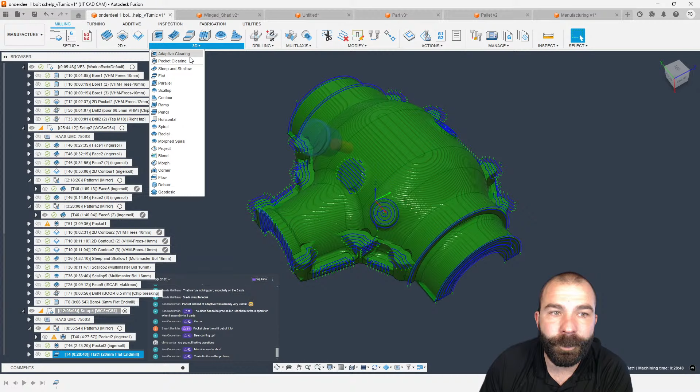Again, what you're seeing here is a crazy automation inside of Fusion to build a better and better tool path and to make machining much easier. Now, I know I did a lot to get to this point, but this is where we could now start to do a lot of our other machining, right? Now, personal opinion, there might be some arguments out there, but what do you got for tools in here? Do you got a ball end mill, 16 millimeter? So let's start with the 16 millimeter, unless you got something bigger. I'm not really seeing anything here.

Now, what I would do is I would do a pre-finish. And what that pre-finish is going to consist of: stock to leave. We are going to keep the tolerance kind of high, just so that we get a fast tool path. I'm also going to do a much larger step down and step over than I normally would do. So this might be more like a 4 millimeter. Well, how big's our tool? 16. So we probably want about a 2 millimeter step down, maybe a 1 millimeter step over.

And we're just going to let this thing go through, knock all of our cusps off, all of our steps, all of our other problems that we may have. So the whole goal right now is just to simply get everything cleaned up. And as you guys saw me do before, we got flat areas I want to avoid. We could go through rest machining to avoid certain areas.

I'm a little confused on stock to leave. Give me a minute, I have to switch back to millimeters here. So stock to leave a 0.1. We're going to ignore stock less than 0.4. Turn on flat areas. And let's just double check this here real quick. So again, getting a good surface finish could be dependent on being able to knock off those cusps quick, fast, and in a hurry. So we're going to give this a few more seconds to calculate.

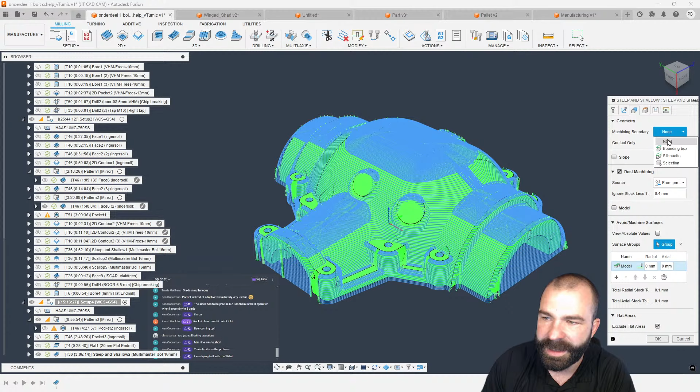So for example here, we're machining the outside of my part. Now I could go do avoid touch surfaces, but the real problem is that I only want to work off of a silhouette, and I only want my tool center of the silhouette inwards. And then I want something like contact point boundary. And what that is going to do is shift my tool out to radius of engagement versus center line. But notice how I'm still up here, right? I'm not down here trying to do a bunch of stuff. I'm just simply working from the top down in that menu.

You were trying to do it with the 16 millimeter ball. Okay, again, I'm a big fan: get it in 3 before we go 5, right? Because if we wanted to right now, we could still stick with steep and shallow. And there's going to be a reason for that.

And it doesn't really matter what 3D surfacing toolpath you guys pick. You will start to notice when we talk 5-axis, there are different options for different toolpaths. This is a 5-axis scallop. We lack lead and lean. Why is lead and lean so important? Well, you don't want to cut on the center of the tool. So this is where, again, steep and shallow, beautiful toolpath.

This is where we start to make those decisions on how we really do this at the end of the day. Now, again, being on a 3-axis or a 5-axis, 5-axis is nice. More axes mean more cycle time, right? But as you guys are seeing, again, I made a boundary change. I'm no longer touching the flanges and areas like that. We're excluding flat areas. Yes, we got a little bit more that we need to go through, but this is mainly meant to be a pre-finish strategy.

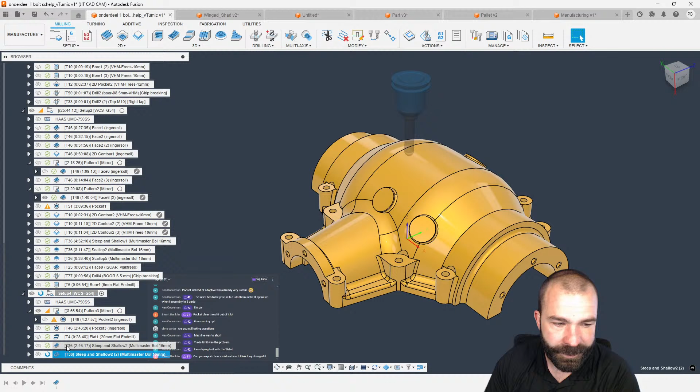So again, I machined all the bumps out of it, and you can see that. If we hit F7 and look at this from the side, notice how a lot of these surfaces are still very curved. But if I go one step above that, when we did our flats, only the flat areas are now pretty, but we're getting the staircase effect. And this is what I want to get rid of, because if I was to try to up mill or down mill across this, it's going to be more and more effort on the tool, more and more deflection, more and more surface finish problems.

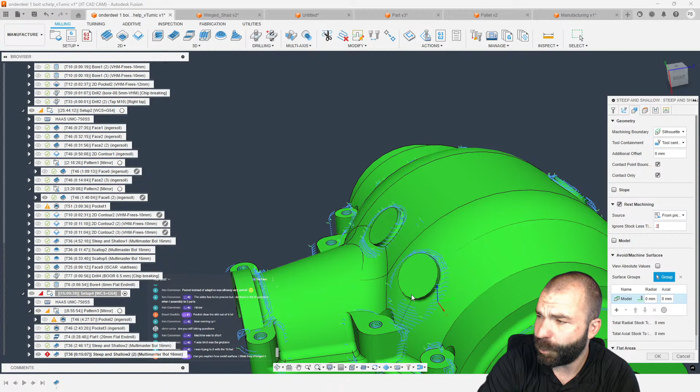So again, I can't remember what I set it to. Did I do 0.2? You know what? When in doubt, go back and check it out, right? So initially we did stock to leave of 0.1. I might take that now. Again, I want to ignore stock less than 0.09. And we should get another toolpath. But this is, again, what you guys are seeing me start to work down through.

The next goal would be how do I do this? I can now transition into multi-axis. From there, I can now do lead and lean. The value of lead and lean is I can force a tool to be leaned over or leaded, meaning lean forward versus left and right. And I can lean backwards as well, but I can stay off the tip of the tool, right? So as you're going to see, if I was to now set lead and lean, I could lean the tool at 20 degrees.

I could also set tool axis limits. Again, there's a lot of things that you could do with this. And what this is going to do is basically say, I want to go no further than 90 degrees, so on and so forth. So again, you can see my toolpath started to show up there.

Now I'm turning on multi-axis, and now I'm going to pivot a little bit more because this is where I might go in and start to do things like the corner strategy. Now, if you notice, the corner strategy here is really well built out so that we can go through and machine specifically features like this down here, up this corner here. Again, another great toolpath that is going to make machining much easier at the end of the day.

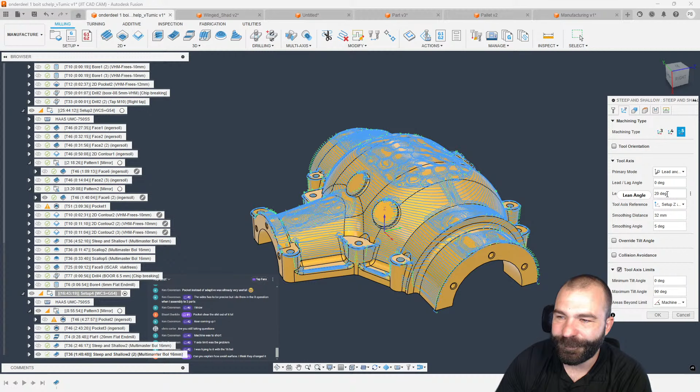So if you look on my right, I guess your left, you guys will notice that that very first thing is if you're at 0, it is perpendicular to the surface. If we go to 88, which is the one on my other side, there we go. Can I get my chair out of the way? We're going to be the opposite direction, right? So I did get it correct.

So now if we were to machine this, we're going to go ahead and simulate. And as you can see, we're getting one of my favorite errors that I always see inside the software.

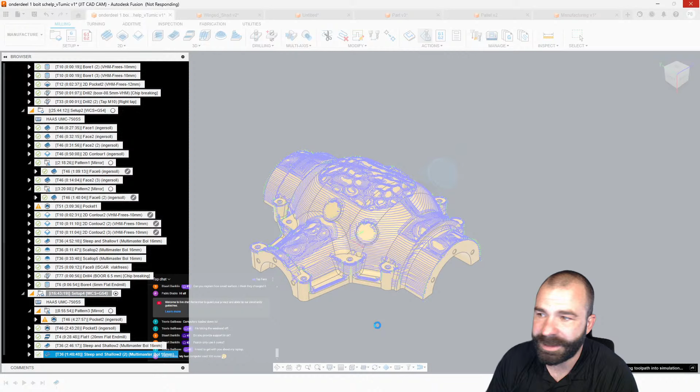I'm going to jump back to Fusion here. I think she's locked up. I'm going to go ahead and shut her down here. So we're going to go ahead and close the program. I think I angered the system. I noticed that the stock model didn't come through there as well. And we'll give this a few moments to load back up.

Need to get with me about a laptop. Yeah, at the end of the day, guys, I do still have my old laptop and I have my desktop I think I'm going to get rid of because I jumped over to a laptop. With as much as I travel and this content you guys see me make all the time, it is much better to me to be on a single computer that is portable with everything and anything.

So again, it looks like we got everything here. It looks like the last save point was rest machining. Let's go ahead and, for the sake of this part, 5-axis, lean, 20 degrees. We want lean, not lead. And let it recalculate here. She's ultra and mega, the computer.

Again, just so you guys know, a lot of people always ask me this question: always go for a high core or a high clock processor. That is where you should spend your money. Do you need 64 gigs? No, you could get 32, save a few more dollars. Don't go 16, always go 32. So let's see here. If we get lucky, we're going to do a normal simulate, and we're going to see if it locks up.

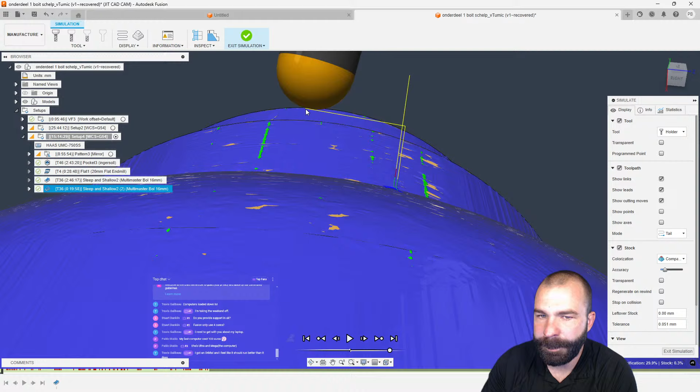Okay, so we got normal simulation. I just want to show you guys an example here. As you're seeing, that toolpath is actually doing the scallop. It's going to look weird because we are calculating the toolpath from the tip, so you're going to see a lot of weird jagged lines. But notice when we're jumping around, we're not cutting on the very tip of the tool, right? So if I get stock turned off here, we are engaging at the 20-degree mark. And that is where you're going to get a much better surface finish.

Now, the strategy I'm using to do something like this is steep and shallow. I'm doing full 5-axis tilting. I will tell you, no matter what you do, and it's not just a Haas thing, there's a lot of machines out there with this problem: when you start tilting more axes, your cycle time is going to go up dramatically fast.

There's also a lot of things on this part that you may approach without utilizing steep and shallow or full 5-axis. And what that could be is if you were to do something as simple as parallel, you could very easily parallel across this part. Again, silhouette, you guys have seen me do this, back and forth, what our step over is going to be, whatever you end up calculating out.

But this could actually run a lot of what you need. So again, we're going down the part versus over it. I could do steep and shallow and use parallel. I'm going to go ahead and set a pass direction here. And as you'll see, we're now running along the part. I'm going to up my step over for you guys, just so that we could see this a lot better.

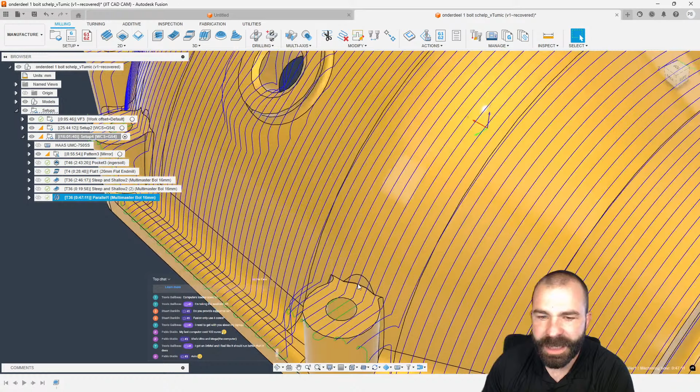Again, you're noticing that we're going back and forth, right? So this could look really good on a lot of these housing areas, wasting our time once again on the flat areas. This might be where you start to use boundaries. Again, we could do a selected boundary. I only want to work in certain areas. You guys kind of see how this becomes a real rinse and repeat kind of scenario.

Again, I'm just going to go up and over this one lug. We actually might stay here. Again, up, over, back, down, and around. Well, let's just go ahead and set that for there. Oh, we went the wrong way, but I think you guys are starting to see the possibilities, right? So get the toolpath and the boundary you want.

If you got the machining extension, feel free to go through, trim toolpath. Let's just say no to this whole area here. Keep the tool outside of that. Again, as you're seeing, I'm very quickly limiting where that toolpath goes; we could, of course, trim this more. Again, there is no ability to avoid flat areas here, but you could do slope. I think it's going to be like 0.1 to 90. Now I'm avoiding my flats automatically.

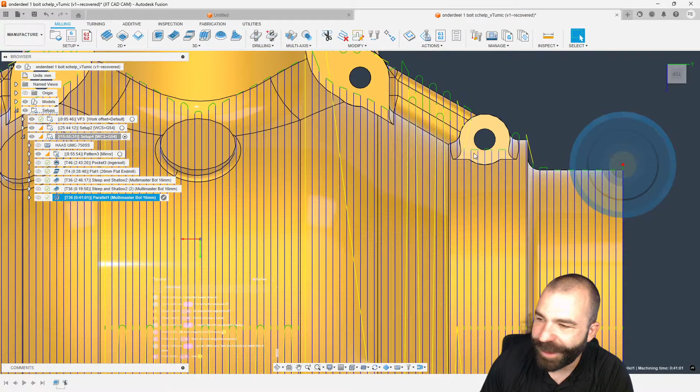Again, until you really need it, there's no reason to get down to using avoid machine areas, right? So again, contact point boundary, because I want a waterfall all the way down the outside of my part. Now is where I could go through and up the ante even more using avoid touch surfaces. These are neat tricks that I've learned over the years, guys. Maybe we only go all the way out to 89.9 degrees. As you're going to notice, I'm no longer going to touch anywhere vertical. So this whole outside wall is vertical. We still need to waterfall down because of the radius of our cutter, but we can achieve quite a few things.

Now, a few things I will also point out here is there is some luxury to the fact that when you think about your model, you could actually say avoid the entire model and then add in only surfaces to machine. As you're going to see me do here is just go through and pick these middle surfaces. So this is the outside the box thinking that if you were to buy custom training with us at jitcadcam, we like to teach people the neat tricks, methods, and ways around, as some of you probably just got your socks blown off at how I reversed the system. So instead I said avoid the whole model, but only machine those surfaces.

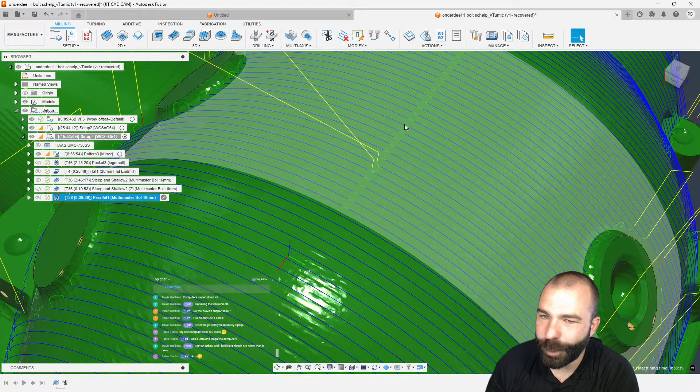But again, as you're seeing, a few of the problems are because of slope. We're avoiding this very top area of my part. But I did a lot of things in that toolpath that I could start to undo. Let's get rid of slope. Again, that's a parallel toolpath.

For those of you that missed it, I reversed my system. So my model right now is actually avoid, but the grouping I want to machine is now the actual action, which is fun because you can now start to do your radial and axial stay away zones, 0.1, 0.1. We should now be staying away from a lot of these lugs. The lugs are now where I would go through. Again, we have the corner strategy. We have the pencil strategy. So really, depending on how pretty you want to get with this, this is why you have certain toolpaths, right?

So now we do pencil. I could do 5-axis pencil, kind of a waste of time, because I would tool orientate to this lug. And then that lug is my selected boundary, so forth and so on, right? So again, I have full reign over being able to go through. Now this isn't going to work because this tool is massive.

But if I swap out to a much smaller ball end mill, if there's one in here, let's see what we got. 6mm ball. Do you have anything smaller? I think that 6mm is still going to be, oh, she's going to be close. Yep, we're just starting to see that tool path. So for the sake of this video, we'd either go smaller or make our boundary a little bit bigger.

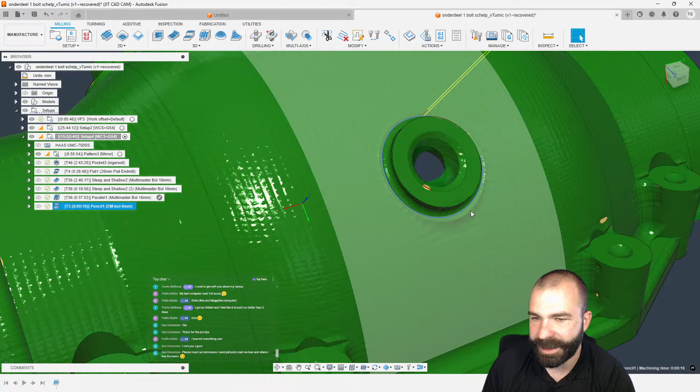And as you can see, I just did a pencil tool path around that lug, right? So there's no real easy way to achieve a lot of this, but there are a lot of tips and tricks, as you guys are seeing here. Now I've just used pencil to clean up around that area. Again, there's still a little scallop there. And the reason why that scallop is there is because we used a large ball end mill. We're avoiding surfaces, tons and tons of things.

So as you're seeing, this is where all the fun comes from, right? So again, instead of doing pencil toolpath, actually, I'm going to duplicate that. Once I get one of them, it becomes pretty easy to go get the others. Again, Z over here now. Boundary changed to this guy. And now we're doing pencil there as well, right?

So again, if we were to do something with the corner strategy, I love the corner strategy because this is one of those tool paths that has a different way to look at your geometry, right? So we're very used to rest machining based on what we've done up until this point. But this is the very first time where we're going to rest machine from a tool. What you're noticing here is I'm doing 3D tool paths, but I'm referencing a tool. And then I can actually do things like oversize the tool, increase detection limits, anything and everything from there.

But this is probably one of my favorite things about Fusion, there's no right or wrong. Again, the corner tool path is basically a really fancy way to do steep and shallow. But instead of utilizing things like your contour, it's still going to do contour, it's still going to do a scallop or a blend strategy. Again, this is where you have that ability to adjust that. But what's going to happen is it's going to allow it to run along or across, right? Again, up milling, down milling. All of these things are fully controllable at the end of the day.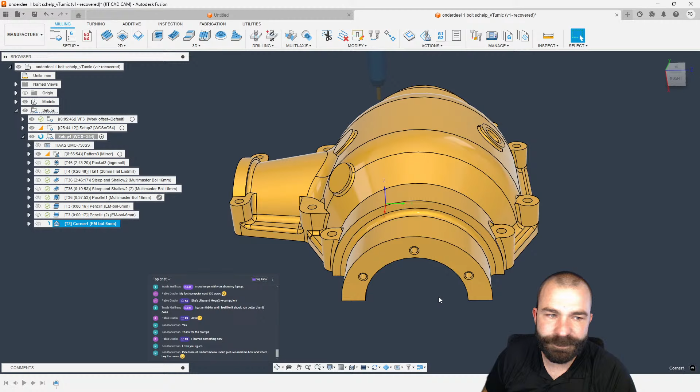So again, just out of the box, we go ahead and hit OK. I failed to up my, we go back here real quick. We're going to go ahead and up that tolerance so we get a fast tool path. Again, for a lot of you out there, if you've noticed some of these tool paths look pretty hideous, it's because I'm turning my tolerance up to get fast results. That's all. So as we're going to see here, step over should be greater than tolerance. That's on me. 0.1. Step over 0.3. Okay, there we go. Should be able to make it happy.

Outside of that, how's everybody else doing? Ken, great to hear it. He says, come tomorrow. Awesome. Glad to see how you go about it.

Again, I know there's a lot of weird things when we start talking about multiple things on one pallet, or as I would say, multiple parts from one work offset; that would be a huge improvement inside of Fusion at the end of the day. Now she's mad. She's working. There we go. So again, due to that corner strategy, as you guys are noticing, we're switching from what is actually the blend strategy into contour. But now I'm going around and I'm recognizing all those areas on my part, right?

Again, this is the fun of having things like the machining extension because I could say, you know what? I'm going to pencil these 3 lugs. Well, let's go ahead and snip that stuff out of the way. And you can get really close in here, which is amazing at the end of the day. There we go. Let's pull her out there. Stay outside of that area.

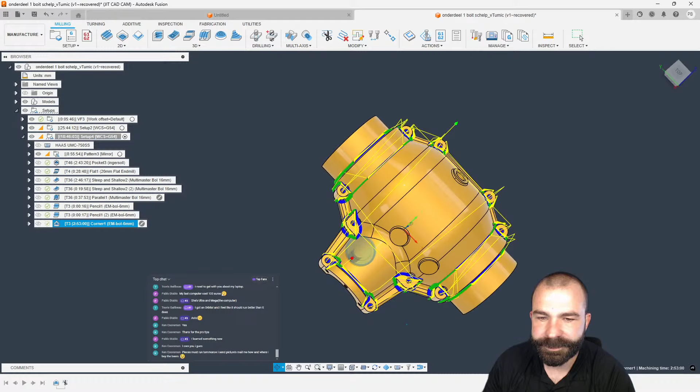Boom. So again, there's our blend strategy. Or not blend, that is our corner strategy. So again, we're getting up and over these humps. Some of these areas unrealistic to get into. As you guys saw me just do there, I did do the trim.

Maybe I go ahead and I start to add in, avoid certain surfaces. I could also use slope again, as you guys have seen. It's just a rinse and repeat no matter what toolpath I kind of go to, right? So again, I don't want to do these lugs. This actually leads me into a really cool thing we could do. We could actually group things also, making selections easier, stuff of that nature.

So what do you guys think? I see a lot of you guys out there. I know we had one more part, didn't we? We got to get another part uploaded here. Free Support Friday. Here we go. Episode 34. I feel like we've been doing this forever. Don't you guys think? I also fixed my camera. Had to update software. Don't we all love updates as Fusion customers?

So Ken, you let me know how's it going and what do you think? If that's going to work out for you. Actually I could close that. Need to pop this back out on the other side. And let me see here. Stuart, you sent in this part.

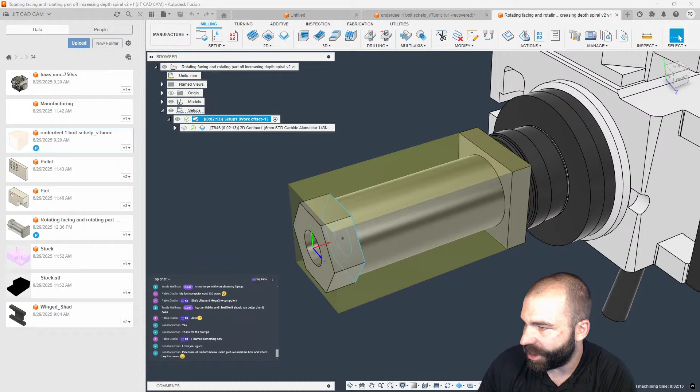How to rotate and face this part, i.e., drop down, apply compensation, and revolve left end. Maybe I'm not reading this right. My brain is not working. Spiral down in Z as it rotates. Okay, so you want to utilize the end mill to more or less surface in a spiral motion downwards, if I'm collecting that data correctly.

No more updates. Yeah, I mean, I don't know why people are still hanging out on Windows 10. It's kind of shocking to me. My rule is when Windows comes out, after a year, I jump to the latest and greatest so that I don't have to deal with what a lot of you are going to go through. But I can give you a pro tip. For those of you jumping from 10 to 11, if you notice my toolbar basically looks the same, you could go to your taskbar settings and taskbar behavior. And then you can come down here and say taskbar alignment to the left.

So again, let's get back to this part. So Stuart wants to know about actually rotating A axis here in this case, but bringing the end mill down and just spiraling around the outside of this part. So what I'm going to do is I'm going to go for multi-axis and we're going to do a rotary contour. Now, I'm wrong. Not rotary contour. We are going to go for rotary parallel.

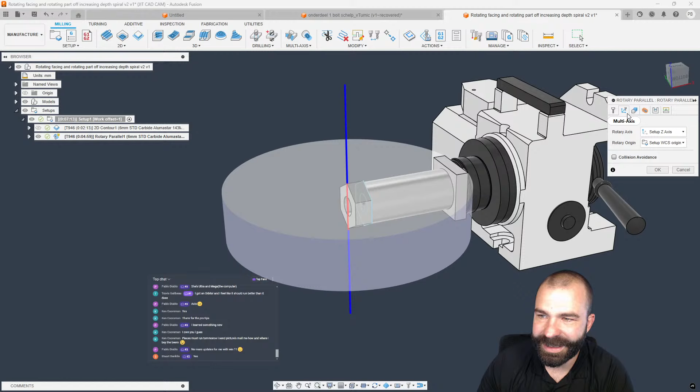And the reason for that, we're going to go ahead and hit the OK button because, one, we need blue lines before we figure out what's wrong with our blue lines. But you'll notice right now everything is running down towards the end of our part, right? So we can fix that. Let's go ahead and go to our geometry. As you're going to notice, we have the wrong axis selection, it looks like. So let's change this to setup X and recalculate.

And now you're noticing my toolpath runs around the outside of the part. However, we lost the fact for it to actually come down this front face here. So this is where, again, I can walk through my steps. I can evaluate my blue lines. Jumping a little bit further, we're working from stock front to model back. Well, in this case, we're actually backwards, but we're not too bad because if I just grab and pull out back, you can now see that toolpath is still not dipping down on the outside here.

However, that could be for a lot of reasons. Let's go ahead and take a look here. So again, we have our model front, model back. We may need to do some tilting at some point to this particular toolpath. But as you guys are seeing, everything is looking good. Stock OD looks like we're good there. Again, we do have a step over. We are doing a spiral motion.

Again, this is where we may need to adjust our toolpath. So again, let's do a few more things here. And what we might have to do, there's no pretty way to do this at the end of the day, but let's just see if I can't do a very simple offset of this face. And then we are going to extend this face. I would like to see if we could at least get a toolpath down that way, if that makes sense.

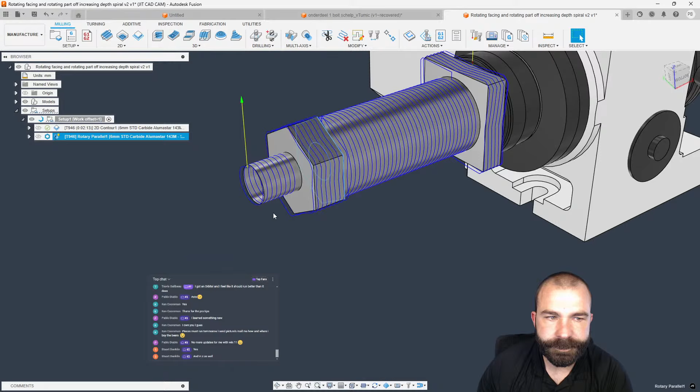So again, we're going to go back to manufacture. We're going to add an additional model, which is that little skeleton skin that we just made. So as you're seeing, we are wrapping around now, but we're not wrapping up and down this surface here with constant step downs, or basically it's going to be a live fourth axis motion, but we're not getting a ton of extra distance here on our part.

So this is a couple of things. One, our actual step overs could be massively smaller. See what that gives us. Going to take a few more seconds now because we did give it a lot more to work with. So the tool is plunging. I get that you want to go outside in. Don't worry. We'll get to that point here at some point.

And for the sake of this, the second part I was going to do to this is we're going to limit where we're working. It's a lot less toolpath calculation. And as you guys know, we'll get our tolerance turned up. Hopefully we'll get a little better toolpath. So as you're seeing, no matter what we do, it's not going to Z-step up and down when it's trying to do this, right? And that is the dilemma that we're basically working with in Stuart's case.

However, there used to be an option. Now I could go to another toolpath as well, which I'm thinking of a few other things, is instead of using rotary parallel, we might be able to get away with our rotary contour. And the reason why I say that is because rotary contour does have automatic step downs and things of that nature to work with. So again, if we go ahead and do setup X, let's get a toolpath.

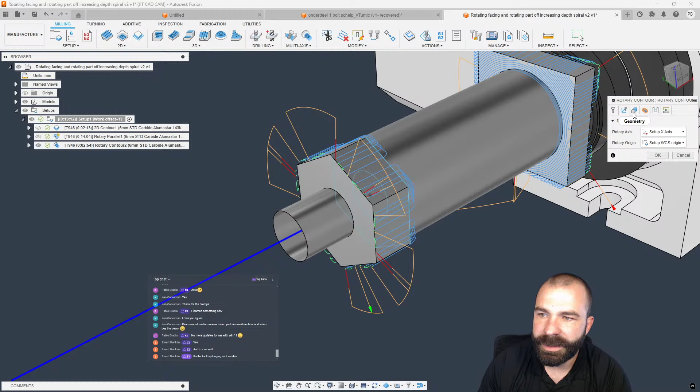As you're noticing, we're going around the outside of the part. We're in the same battle as before. Again, we have our front, we have our back. Let's pull our back out. Let's move our front closer to our actual working area. Give her a few seconds here. Now you're noticing we are spiraling around the outside of our part. So again, rotary contour in this case, Stuart, might be the better fit for what you have going on.

Go ahead and get that actual contour out of the way. And just like that, we are spiraling farther and farther inwards. Now I need to limit this even further. And if you guys didn't know, this is where I could actually do some things like I want to use a selected edge. And now I want that selected edge. And if I type tool_diameter, divide by 2, give her a second here. I've now shifted my boundaries, right?

So again, as I'm now doing some math here, what we don't want is we don't want to start in front of or behind these locations. So we might have to do some adjustment as well. So again, a selection here. And if you guys want to see this a little bit better, I'm going to go ahead and click these 3 little dots, edit expression. What I'm doing is I'm actually using a parameter, tool diameter, which is the current operation diameter times 2. And in this case, times -2, because I would like to go the opposite direction.

Is that a 6 millimeter tool? Me. It's me, guys. It's always me.

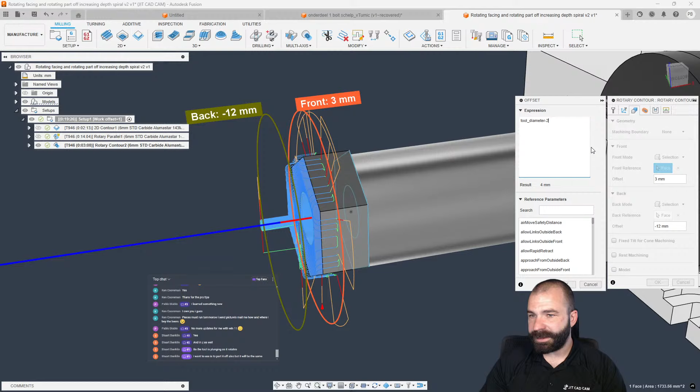Or it wants me to spell stuff right. Guys, there's a reason I'm a machinist and not an English teacher. Oh, we did that wrong. I'm going to have to fix that.

Again, what I'm really trying to do, in case you guys are really wondering, is I'm trying to get this guy set so that it's working within a certain window. There we go. I feel like that's almost right. We got to get right there eventually, right? So there that is. And give her a few seconds. Yep, so we're going to have to bump it just a little bit more.

Again, looking at that side view. This guy out a little bit. This guy in a little bit. We might also be able to stop it right at. But what I'm really going for is, as you guys are going to start to see on the end of this part, is we're getting that spiral effect, right?

So if I was to run something like this, and if we say simulate with machine, might have to do some adjustments here, but what you're noticing is we're rotating around because we don't have machine simulation. But let's get these corners machined real quick. Yeah, it's going to keep stepping down. Let's just fix it. I always try to hack stuff up for you guys to make it easy, and it never works out that way. It's always a problem.

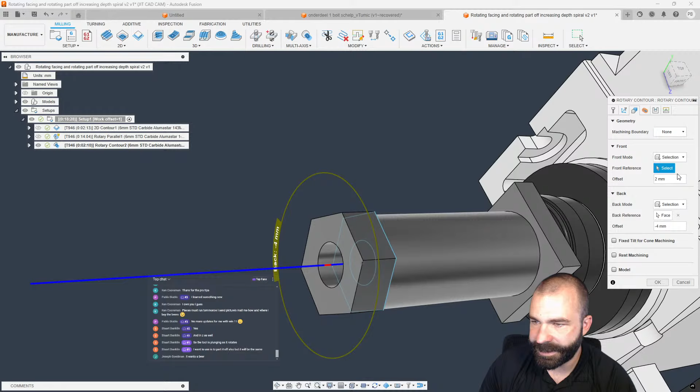0. Still wants to wrap around. So funny that it does that. One more. Boom, there. I'm going to anger the system today. All right, that's fine. -4. Actually, it'd be minus.

Any other questions outside of that? I know some of you guys always have questions. As you're watching me fail pretty miserably right now, I'm trying to get this guy not to machine the top edge. Now, I could put a boundary in here, which might be quite handy. But really, I just don't want to be touching this top area. And for some reason, she just does not want to respect what I'm trying to tell it to do.

Let's do this. Oh, duh. Again, still on me. Now it's still on me because I'm positive, not negative. And every once in a while, you guys get me with some good ones. Yeah, we'll have to do a little bit more with that. But the idea is that at some point, you're going to get down and start spiraling inwards. And that's what I'm trying to get after here with this toolpath. Just getting what is the number that it wants and not touch that upper surface, right?

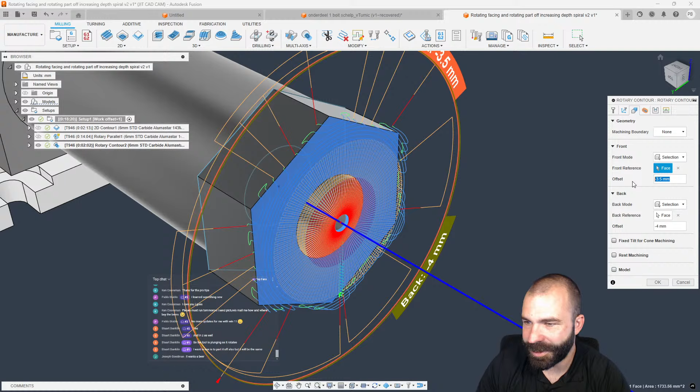It's fighting me. Fighting me more and more and more. It wants a beer. Fuck, I want a beer after dealing with this stress. See, now it doesn't want to do anything because it's the same numbers. So, presumably I would tell you guys at the end of the day, there's no actual good way to do what you're trying to do with this. It's just the nature of the beast.

Now, something I can think about, and this is going to be ugly. I already know it's going to be ugly. I've done this a lot. So we're going to go back to design. We are going to delete that extension that I did. Let's just go for it. I have an idea and I think I know what's going to work. So this is the surface that I did pull from. Now what I'm going to do is I'm actually going to split that surface utilizing one of my planes.

And the reason for that is now if I go back to manufacture, if I was to do a traditional 2D contour, but do a wrap, as you're noticing, I can define what I want to wrap around, but then I can also define the contour itself. Now, the real trick here is you can't by default do 360 degrees inside of Fusion with a wrap.

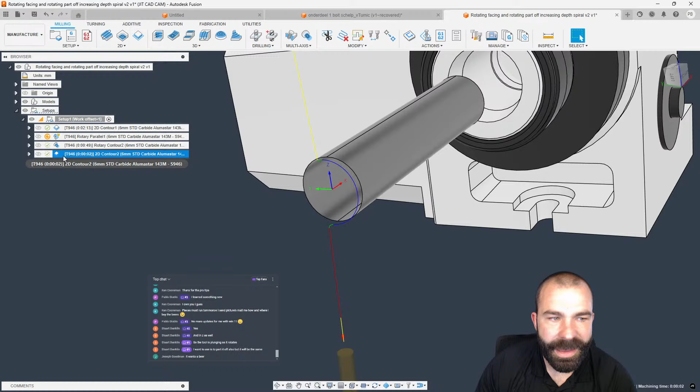So what you're going to see here is I'm now wrapping around. I'm on the wrong side of this. Again, I need to go in, flip that chain so that I'm on the outside of my part like that. And then we're going to get there. I promise you guys, we're going to get there. Because the idea would be, without lead-ins and lead-outs, I could use ramp. What ramp is going to allow me to do is to spiral around that part, right?

But I got to do it better than this, and I'm thinking of a couple of ways that are going to work. So I'm going to actually go back to design, not use the surfaces I've created, but I'm just going to drop a sketch on the end of my part. Now, the trick here is going to be to create an arc based on center point. And you'll see why. Center, 1, 2, because I've now created an arc that's going to be less than 360 degrees around. So I have a start and an end point now.

So again, I go back to manufacture. It's going to ask me about wrapping my toolpath. What do I want to wrap around? Again, whatever that face is going to be. My contour now this time is going to be that line.

And you'll notice a giant mess, as you can see. Well, let's go back through this one more time. Should be able to unwrap geometry. And now I'm spiraling around that part back and forth. But it gets better than that, because if you were to go in and utilize things like tangential extensions, we should be able to extend those in some way, shape, or form to get what we're going for.

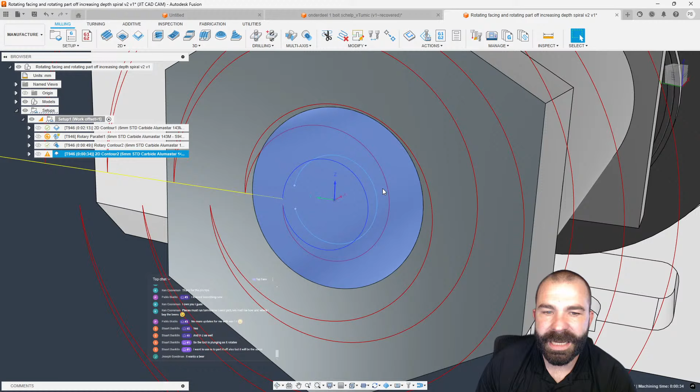Another thing that you're going to be able to also do at the end of the day is actually decrease the amount closer to center, move your points closer together, things like that. So again, we go to your heights tab, bottom height. Is that the selected contour? Is it stock center? Is it origin in this case? There's a lot of ifs, ands, or buts about it.

Again, as you're seeing, I've now gone to origin, which means at some point we start spiraling further down. I have to control everything based on ramp angle. Again, it's a little messy, but it does work at the end of the day. So again, you could have a maximum ramp step down amount, things like that, all based on that sketch that I drew, right? So again, we could go back to design, I should say, get my points closer together.

At some point, if I get too close, notice how they want to link together or overlap. So you're always going to fight that little bit extra, right? But this is just one way. There's a lot of ways to do stuff inside of Fusion. You tell me, Stuart, is this going to work or not?

So again, now my tangential extension is respecting and overlapping because I've made my points so close together. And if you were going to simulate this, I'm completely upside down.

I think this is a good one to close on, but I am going to go check the ticket system while this runs. You guys can watch it. Anybody else up? Questions? All right, we're going to go ahead and we need to convert Stuart's into a ticket. And if you guys are blowing up chat right now, I have no idea. Here's that. Any other questions in the meantime? Boom. Solved. Who else had questions? There we go. Resolved. Back to chat.

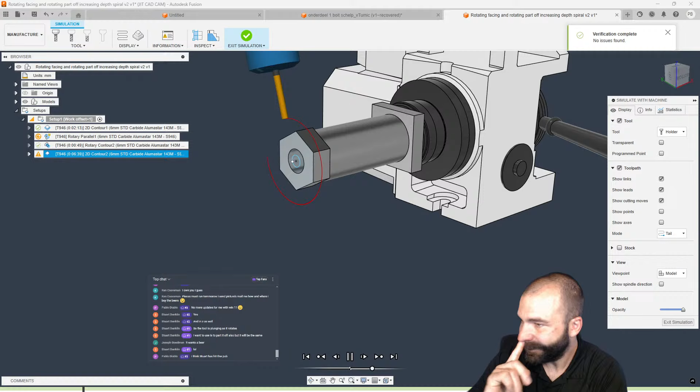What do you think? Is that going to work? I think it would work. You do have overlap when you come back the other way. But as you're seeing this work down into the part, again, we need to adjust a few more things, but it's 100% working its way in. Now, it's not full 360 degrees around every time, but it is working towards center to be a part-off kind of operation. Now, this is where Stuart's probably going to tell me that he meant to part off the hex, if I had to guess.